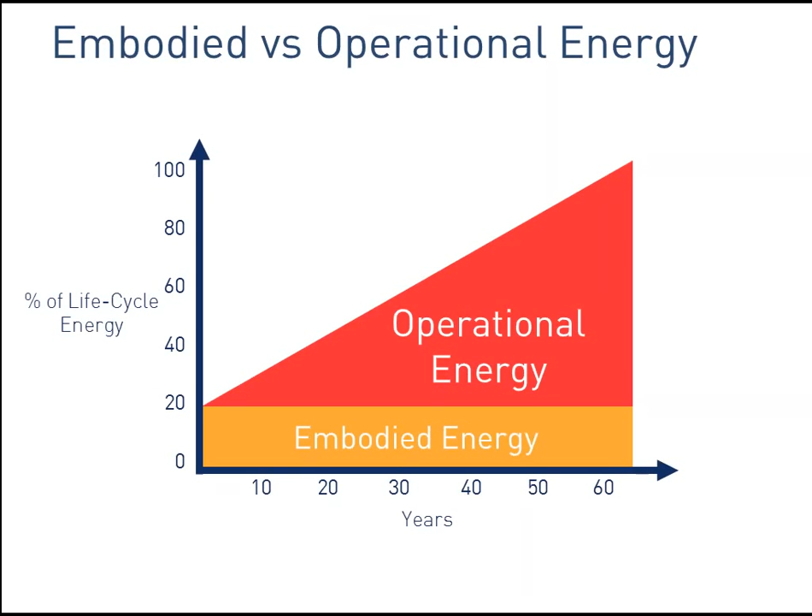The embodied energy - the actual materials that go into building that building - is dwarfed by the operational energy. And that's not a hit against historical buildings. I'm a huge advocate of historical preservation and historical buildings, but I think folks in that world need to get their facts straight - you shouldn't do it for the embodied energy aspect of it.

It's also good to keep in mind, in terms of embodied energy, one of the biggest factors in the building really is the foundation system and the steel components and concrete components - the biggest chunk.

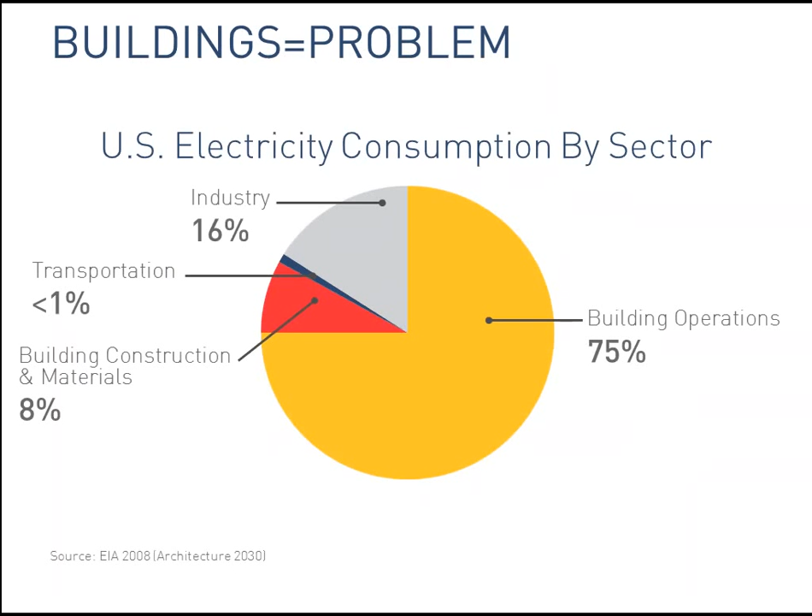In that first pie graph I showed, we were looking at energy use across not just electricity, but all energy. This graph shows the impact building operations have on electricity consumption specifically, where building operations take about 75% of all electricity used in the United States.

This is another tenet of the 2030 challenge - we have a huge opportunity ahead of us, by 2035 about 75% of all buildings will either be new or renovated.

Can you give a little more background on the 2030 challenge? Yeah, I mean, it's essentially started by Ed Mazria. You want to give a little?

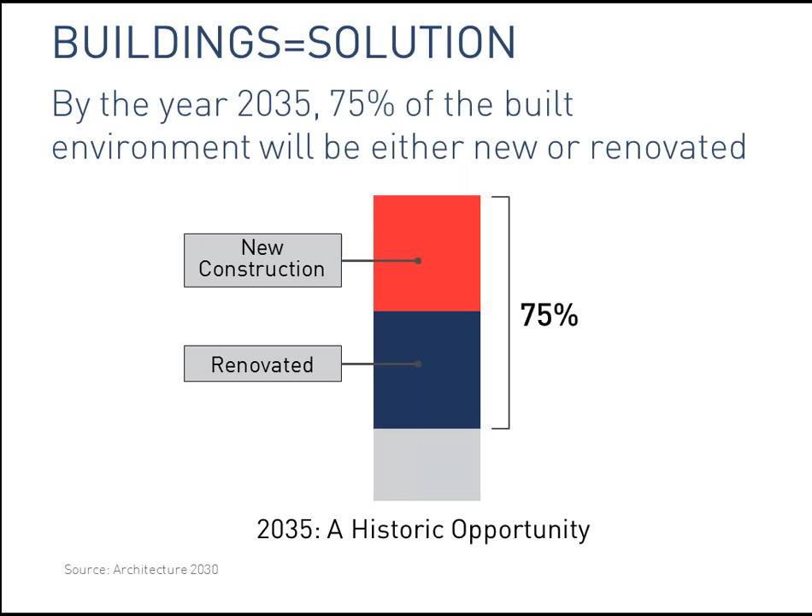It's essentially a lot of it's kind of like there was a really big push, especially during the recession, to get a lot of initiatives passed to put people back to work, retrofitting and improving buildings and making building codes more stringent. The goal is that by 2030 we can have our buildings be carbon neutral, essentially. Ed was one of the really early passive solar guys, and a lot of the things we're talking about today are things he's been a proponent of for 20 to 30 years or longer.

He said the volume is horrible here. We've had some issues. I'll hold it right here.

The folks in here are probably pretty savvy, but just a reminder in terms of energy consumption or electricity consumption in the state, a lot of people have the misconception that it's clean hydroelectricity and we shouldn't really worry about it. But in reality, the U.S. grid is broken up into three sections.

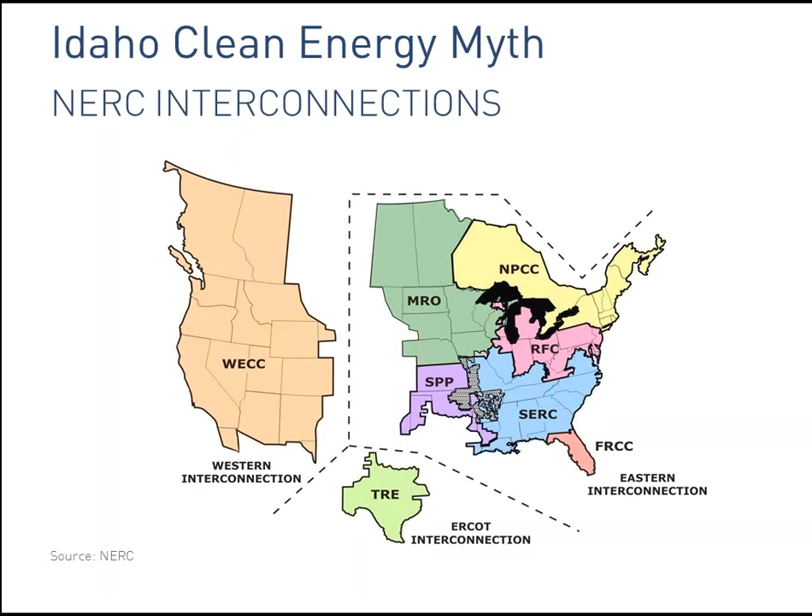We basically have the Western Interconnect, the Eastern Interconnect, and the Texas Interconnect. Essentially all the electricity in the Western grid pretty much flows freely between the whole region, so any hydroelectricity produced in Idaho can get shipped anywhere. So if we can conserve a kilowatt of hydroelectricity here, that prevents a kilowatt of coal being burnt somewhere else.

Then Scott, give a little bit of background on the passive house standard now. Information about why this is important, and why it's really good to learn about that, the passive house standard, what that is and what it's changed about.

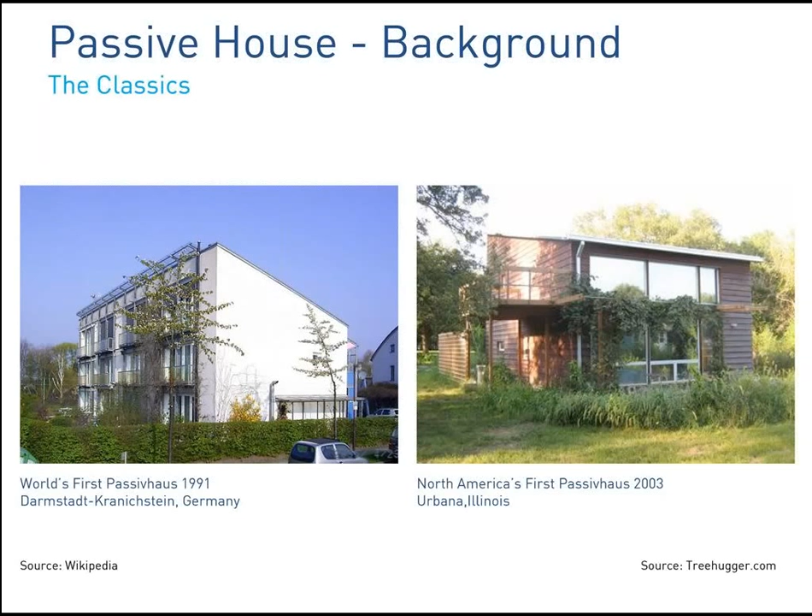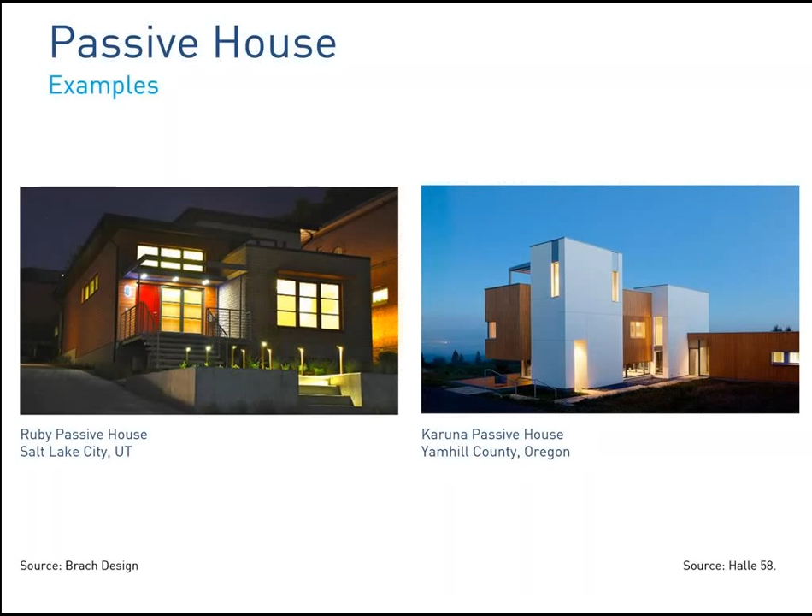A couple of projects we looked at - one on the left is in Salt Lake City, designed by Dave Brach, and I actually worked a lot on that project. The one on the right is a very nice project in Oregon that Skylar was involved in. That's a net zero energy project, and in addition to being passive house certified, it also has a Swiss certification called Minergie, and it's a LEED Platinum building. It was a really cool project to work on.

So what is it? We covered the principles and the science, but these ideas are really what you come away with if you have someone interested. I think these principles of air quality and superior comfort come through - there's a lot of insulation in this house, there aren't any cold spots, there aren't any drafts. In front of a window, you don't feel that cool air. The envelope is very, very tight, and the air quality is very good.

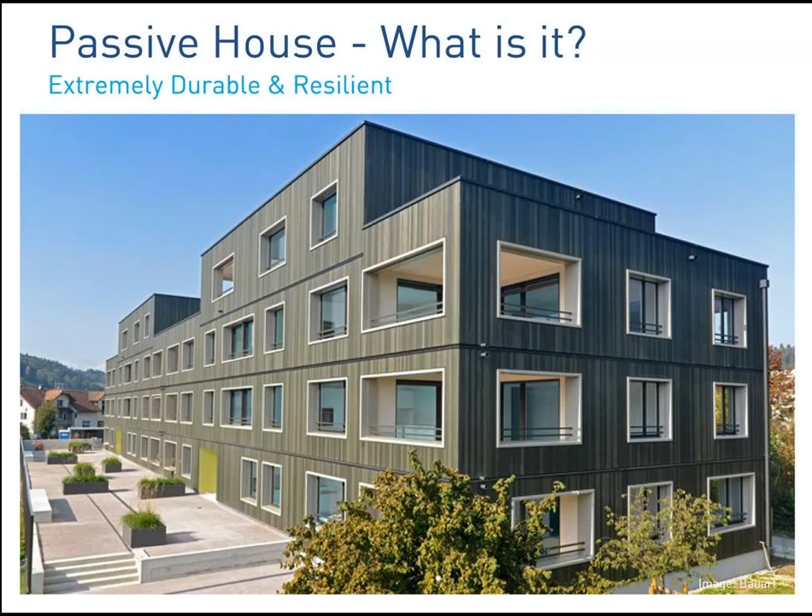If we had just designed this project to the LEED standard, for example, and done LEED Platinum, our array would have probably been three times the size. By investing less in renewables, we were able to put that into the shell and get really high performance windows. These walls are R60 walls, with R100 roof assemblies and R40 plus foundation systems.

Now we can really dive into the principles of what makes a passive house a passive house. This isn't really breaking news—people do bits and pieces of this, and in Boise, people are already doing a lot of these things. But it's really about bringing all these things together in the proper way that makes this possible. So we start with this little model house.

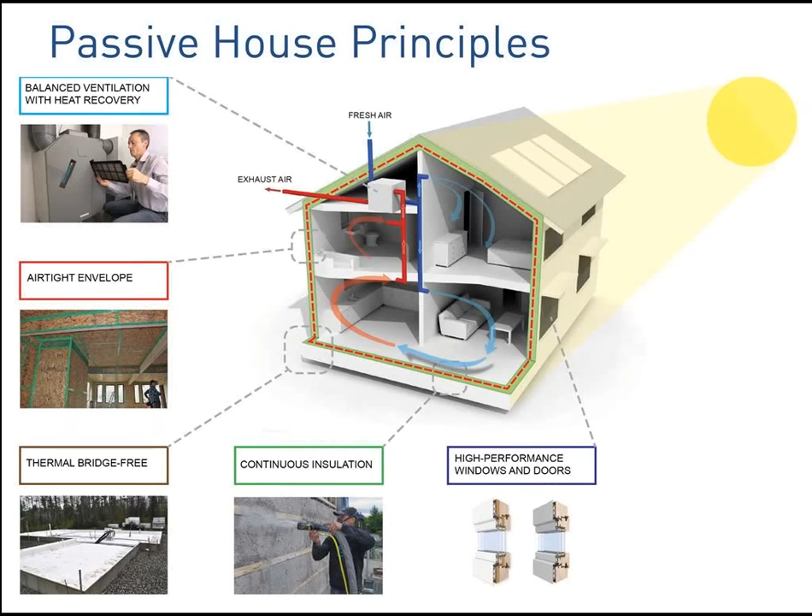Then there's the balanced heat recovery ventilation. We're making the building tight, so we're able to control the airflow through it—a really high performance, 90% plus efficient ERV or HRV that's able to bring fresh air into the house and remove pollutants.

A big key here is that sometimes passive house and passive solar get confused. Although in our energy calculations we do take into account solar gains, these projects aren't the mass and glass, old school passive solar projects where you try to capture as much solar energy as possible and store it in a slab or water bottles or rocks. It's really about optimizing shading strategies so we don't have to rely on huge diurnal swings of bringing in temporary energy and storing it overnight, where the house just loses all that energy. It's really about moderating the heat levels and temperature in the home.

So you mentioned the ERV and the HRV—what are those and what's the difference? I'll get into more depth on that, but basically they're a box. The question was, what is the ERV or HRV and what's the difference?

Essentially they both recover heat energy. If you have stale air exhausting out of your home, you're bringing fresh air in, and that incoming air gets tempered by the air leaving through a core in the building. It's basically a box with two really efficient fans that provide constant air exchange without a huge energy penalty. The difference is that the energy recovery ventilator not only recovers heat but also recovers moisture from the airstream. I'll go into more detail on that in a little bit.

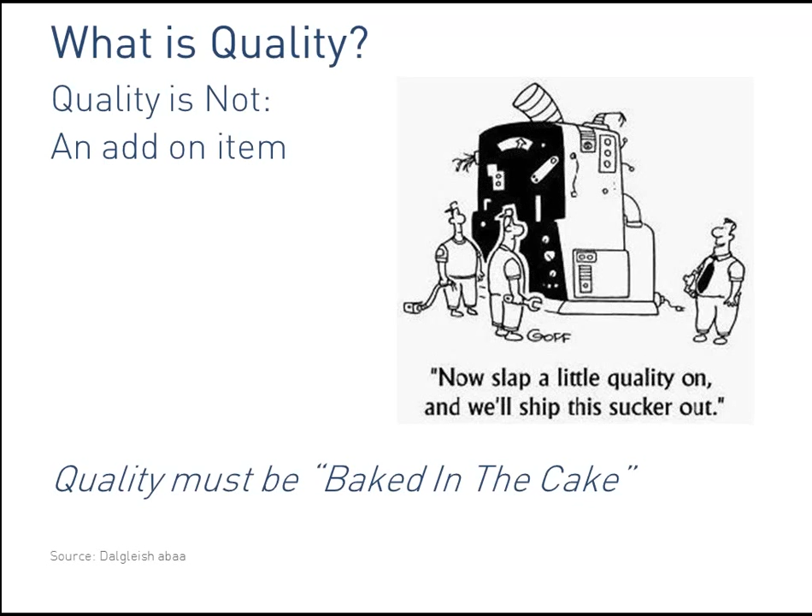There's this little cartoon here where these guys just whipped out a machine, and now they're ready to slap it through their quality control checklist to make sure it's a good piece of equipment—that just doesn't work. So the cool thing about Passive House is it's a purely performance-based criteria, all about the energy use in the building, and as a designer you have the freedom to use your building science knowledge to make it work.

So these are really the three. It's not a prescriptive standard, but it's really important that you basically have to meet them. You have an infinite variety of ways to do that, with all the materials available to you as a designer or builder, or just what you want to use for different reasons. So you just have to put it together in the right way to get to these.

If you're one of the designers lucky enough to have great solar gain, you can leverage that and optimize your design, actually reducing your insulation levels and balancing everything. And if your project is in the city or a densely forested area, you can utilize better performing windows and super insulation to reach the goal however you want to do it.

So the cool thing about passive house is this annual heat demand criteria - that's really what differentiates the standard. It puts a very strict limit on how much heating can be used in the building over the year. It also has another limit - in the U.S. we talk a lot about energy use per square foot, which is a really common metric especially in commercial buildings. Passive house takes that one step further and makes you account for your source energy - not just the electricity used on site, but the energy required to produce that kilowatt of electricity. The other final tenet is airtightness, which is a huge component of quality, comfort, and durability.

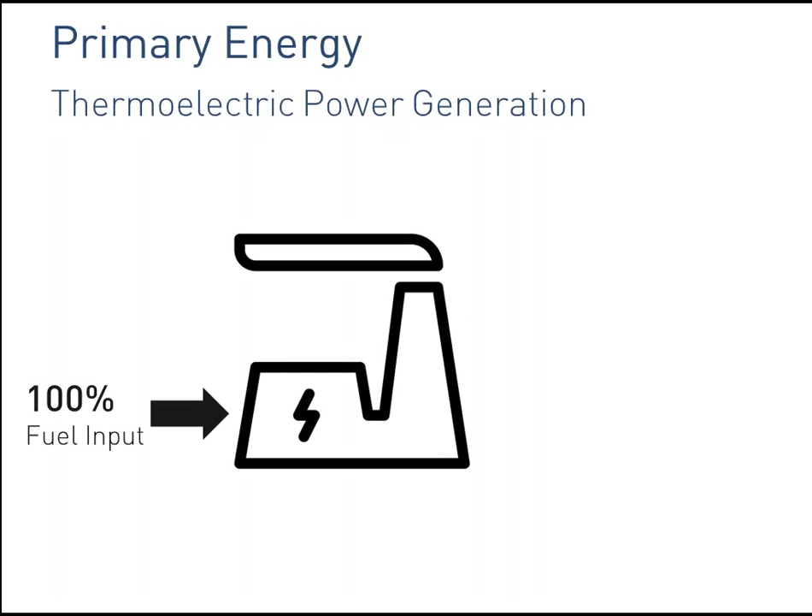For those of you not up to speed on site energy versus primary energy, let's run through a quick exercise. If you're at a thermoelectric power plant, say you start with 100 units, basically 60% of that goes up the stack as waste heat, and about 40% goes out as electricity. We use a lot of that initial energy just as waste heat in the conversion to electricity.

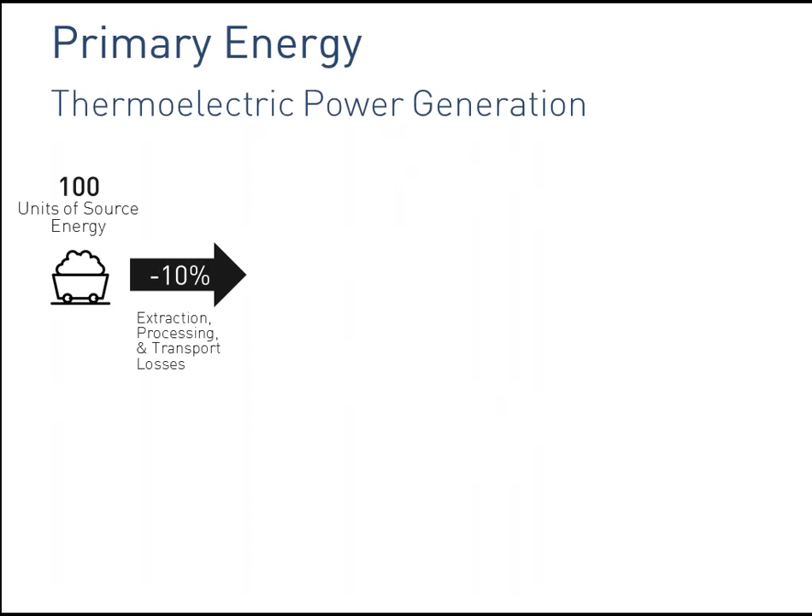This is going through how the Passive House Institute calculates primary energy. At the coal factory or coal mine, there's energy used in extraction, processing, and transport. If you start out with 100 units of energy, you end up with 90 that actually gets to the power plant, and then you have 60% conversion losses.

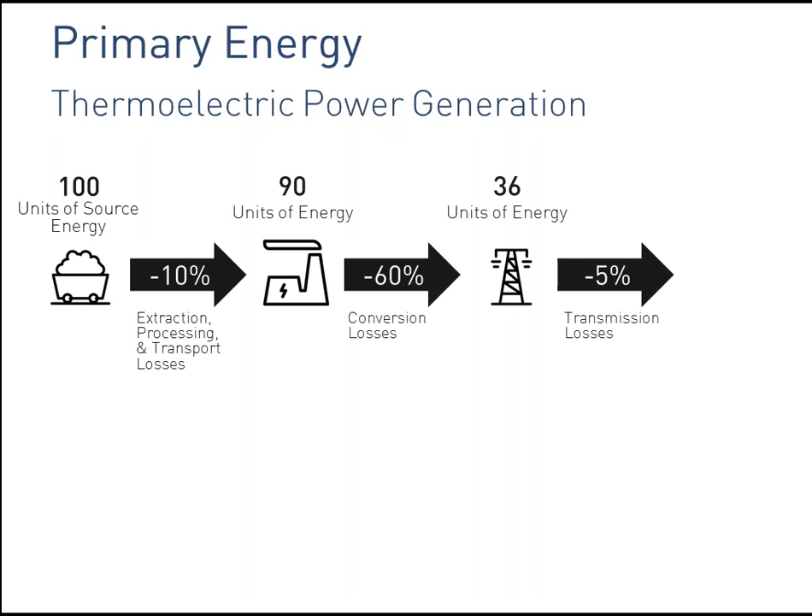And so you have 36 units of energy that go to the grid. Then the grid itself might have a few percent transmission loss. So in the end, the site energy, where you started out with 100 units of energy, that's the electricity that actually gets to your home.

So 3 units of source energy roughly equal 1 unit of site electricity. Compare that to natural gas. If you use natural gas to cook or heat your hot water, you have a much better source-to-site conversion. You lose very little in distribution or extraction processing, and if you start out with 100 units of source energy, you get 90 units of site energy, which is more favorable in terms of primary or source energy.

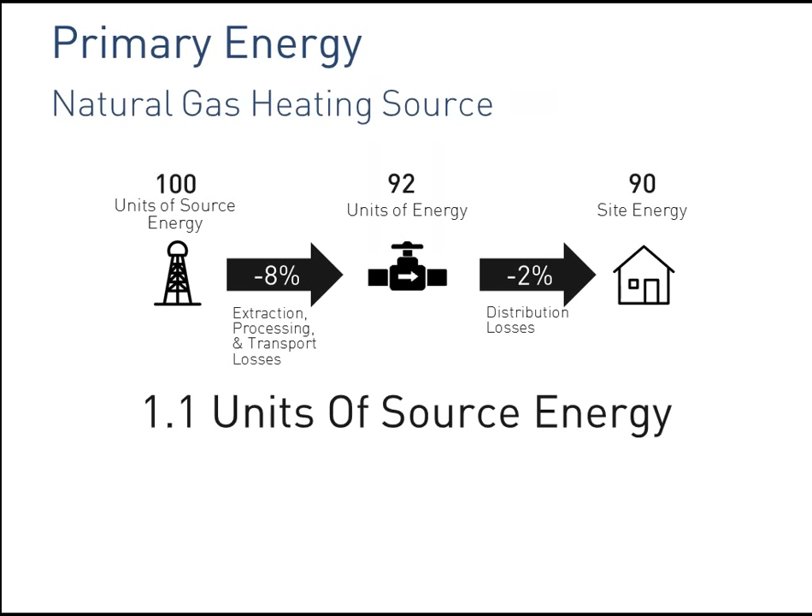And that's why on the electricity side, even in a passive house, which generally has a small heating load, that can offset inefficiencies of the electrical system.

With that in mind, the typical nomenclature in the U.S. is to use the EUI, especially on commercial buildings. With passive house, if you have an all-electric project, to get to the passive house standard you need to multiply that by the primary energy factor, which is another thing that's changing on the electrical grid makeup.

So essentially, if you have a house that is an all-electric passive house, your EUI is around 14. For those familiar with energy use index, that's a very, very low number. A lot of people confuse this and say, oh, my house is a passive house, it meets 38.1 kBTUs per square foot per year, but they're not doing the site-to-source conversion, so it's totally apples to oranges.

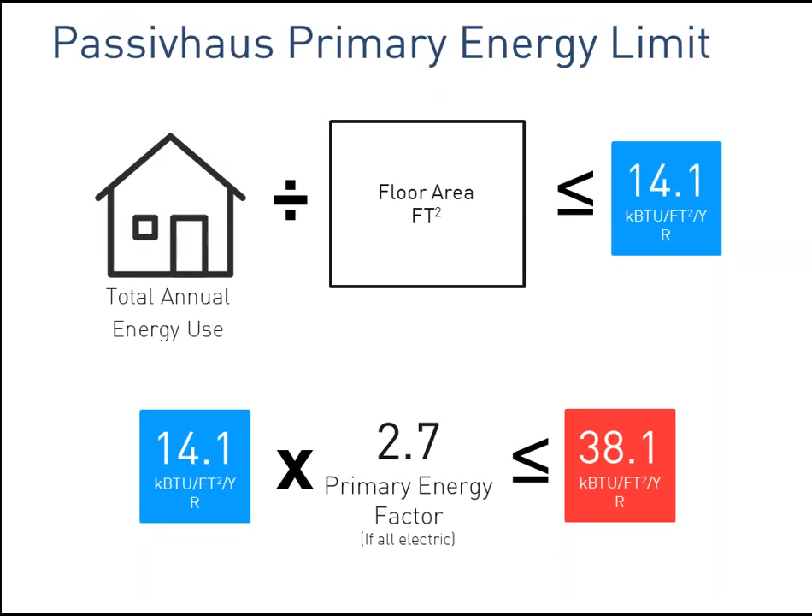So the cool thing about this standard is right away when you start a project, you have an idea with source energy—even if you just know you're going to build a 2,000 square foot house—if you know you're going to achieve passive, it gives you a starting point at the onset to get an idea of your carbon emissions and your on-site electricity usage. It's a very good tool because you know really early in the phases how much energy the building is using if you design it to the standard.

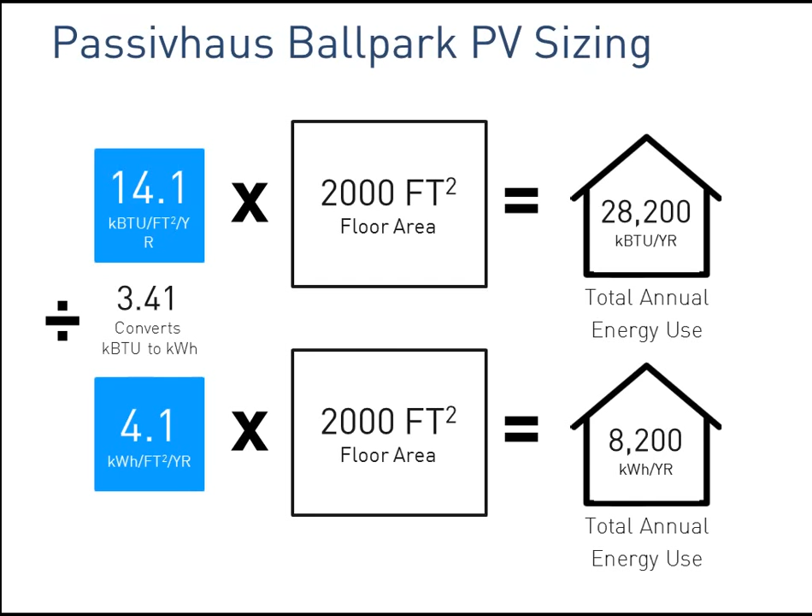And it's really great on net zero energy projects because these energy metrics give you a pretty good understanding of what your PV system size is going to be if you're trying to have either source or site energy net zero. You can quickly run through calculations where you take the EUI in kBTU and see what your annual energy consumption is going to be. You can take PV system performance in Boise, convert that into what your system size is in kWs, and have a really good idea of whether you can fit the system on your roof.

Can I fit it in my lawn? Does net zero make sense for your project? If you don't have solar access and a building that's very dense and very tall, it's likely you're not going to have enough roof space for a PV system. So you can know really early in the project, if I design to this very stringent standard, what my PV size is going to be.

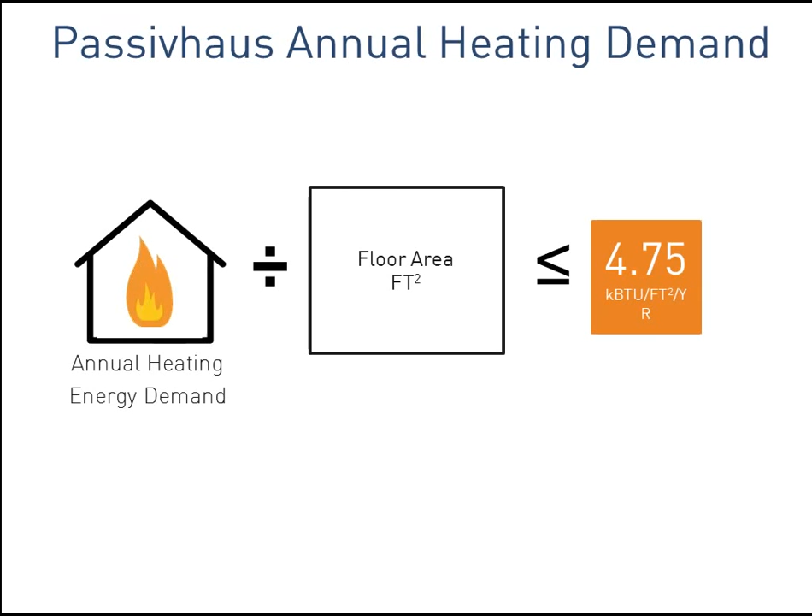And then the same kind of limit is set on the heating demand, which is how much energy the house is predicted to need for heating. So again, early in the project you can say, okay, if I design to the passive house standard, I'm going to roughly use this much annual heating demand, just depending on the size of the home.

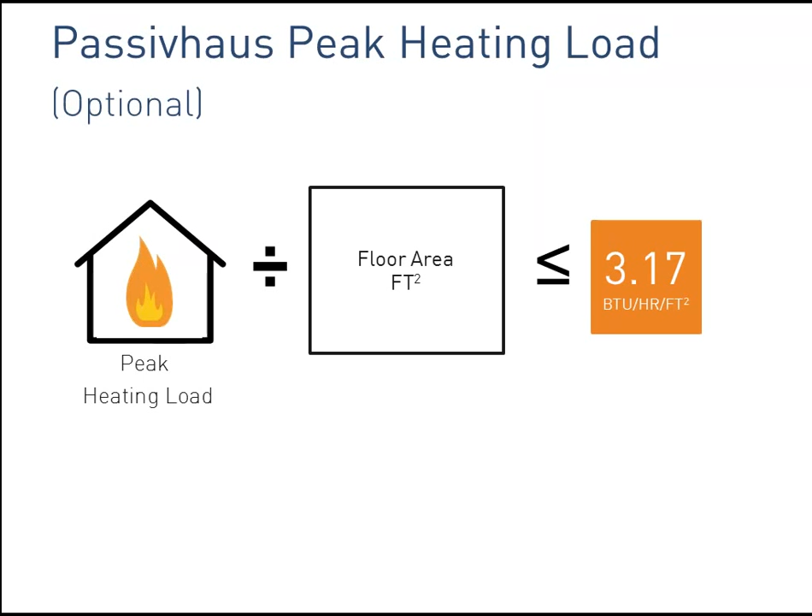Then another piece of the puzzle is an optional part, and this is again very climate specific—if you can meet the stringent peak heating load requirement of the passive house standard, you can also certify under that. This originated with the concept of being able to heat the house with the heat recovery ventilator, heating that airstream instead of having a traditional furnace. There's a standard that allows you, if you design the shell to a high enough level of performance, that on the coldest design temperature of the year you can heat the house for under 3 BTUs, you can also meet the standard that way. So if you design to the standard with a 2,000 square foot house, you know what your peak heating load is going to be.

To put this in perspective, if you design a 2,000 square foot passive house in Boise, its peak heating load is going to be just over 6,000 BTUs per hour. A human, depending on activity level, puts out about 350 BTUs per hour. So a family of 4 living in this 2,000 square foot house on a design day, one of the colder days, can actually meet 22% of the home's heating demand, the peak load, just from their own body heat. That's how high-performance these shells are.

Passive house uses a slightly different design day. Instead of sizing your heating and cooling equipment to the absolute coldest temperature, like say it can get to -10 in Boise, we don't design to that. We design to a more realistic temperature, like -2 or 10 degrees, which is basically the temperature where if it's 10 degrees outside and 70 degrees inside, we ask how many BTUs we need to add to the building. At that temperature the building has lower performance, more heat loss, so you need to input more energy to meet the load.

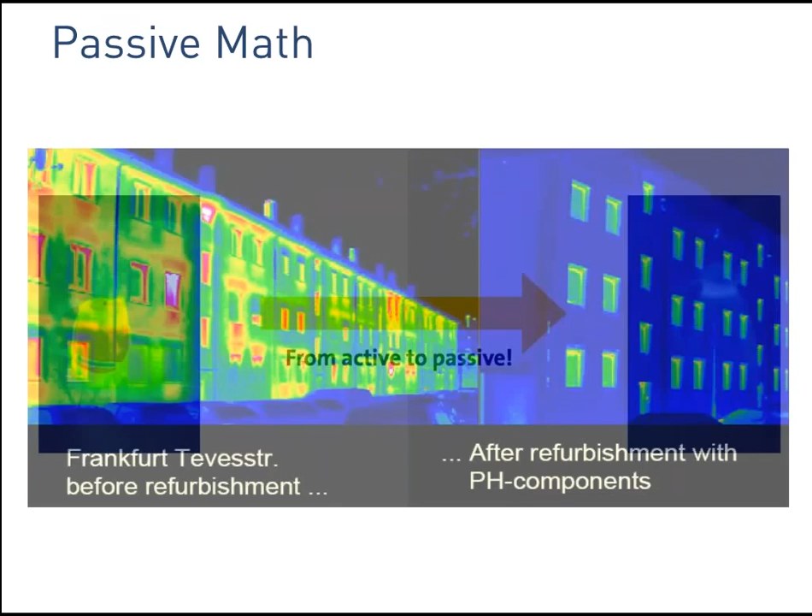One of the things with a high-performance building is that the free heat from internal gains inside the building can be, and in most cases is, especially in North America with our higher plug loads, as important as solar gains. So passive house really isn't entirely a passive solar standard.

What happens in the summertime with refrigerators and other appliances? It's similar—a regular house typically has all those things too, except these appliances are even more efficient and generally have less heat output. If they have a heat pump system used for heating, that same system is usually used for cooling. Just like your refrigerator, you want it sealed tight, gasket tight, and well insulated, and then the heat pump pulls that heat out and cools the temperature down. The same concept works on a bigger scale.

You have these plug loads generating heat in your home, and if you have multiple consecutive hot days in a row, a passive house is going to need cooling just like any other house would. If there's not enough diurnal swing at night to do night flushing, the ventilation systems have a core bypass that does night flush and cooling, so it doesn't recover the heat inside the building—it actually rejects it and brings cool air in. So there are a lot of strategies.

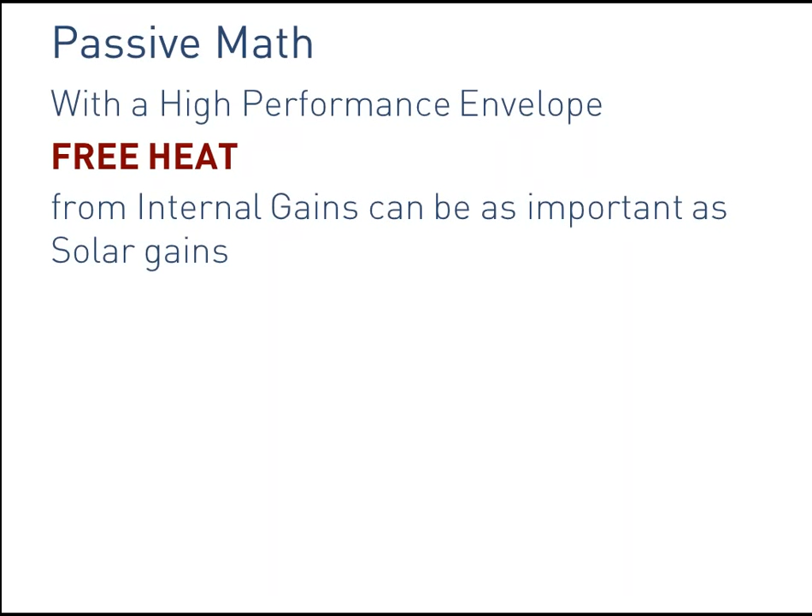Back in the 70s and early 80s, when people didn't have high performance insulation systems and had these high heat losses, the goal was to ramp up and get as many solar gains as you can, because you're going to lose them all anyway. That's where passive solar really came from.

But with passive house, instead of having all this extra added heat, the goal is to really minimize the loads. So when you super insulate, use high performance windows and doors, and make the building extremely airtight, you get those heat losses down to where now your internal gains and solar gains become meaningful and actually useful. Typical passive house design reduces the heating demand by about 90%.

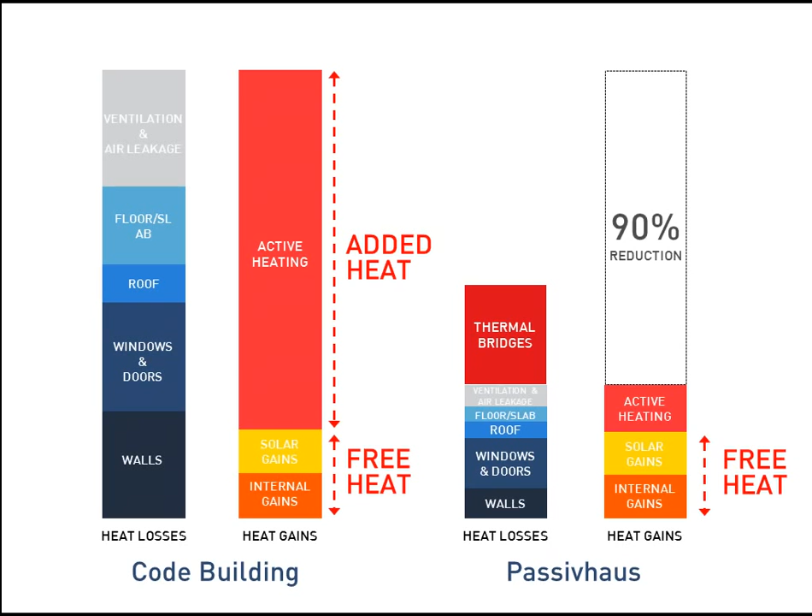The simple concept here is that heat transfer occurs from the warm side of the wall to the cold side of the wall. If we have an R20 wall and we want to cut that heat flow in half to get to our really low passive house load, hey, all we have to do is double the insulation. We go from R20 to R40, and we're on our way to getting a passive house. But it turns out it's not that easy.

This is a quote from Dr. Feist, one of the founders of the passive house standard. He says: 'I was working as a physicist when I read that the construction industry had experimented with adding insulation to new buildings and that energy consumption had failed to reduce. This offended me. It was counter to the basic laws of physics. I knew that they must be doing something wrong. So I made it my mission to find out what, and to establish what was needed to do it right.'

The early experiments in low energy buildings really weren't panning out, and it just didn't make sense, because technically the insulation—it's simple physics—it should work.

I'm going to run through some scenarios. Let's say we have a standard 2x6 wall with typical cavity insulation, roughly R20. A typical house has a 20 to 25% framing factor—basically, if you stacked up all the wood in the house that holds the structure up, it would account for the equivalent of one entire wall out of four being solid wood. That's the magnitude of wood framing in a typical home. So the heat loss through this wall is really dominated by the wood instead of the insulation.

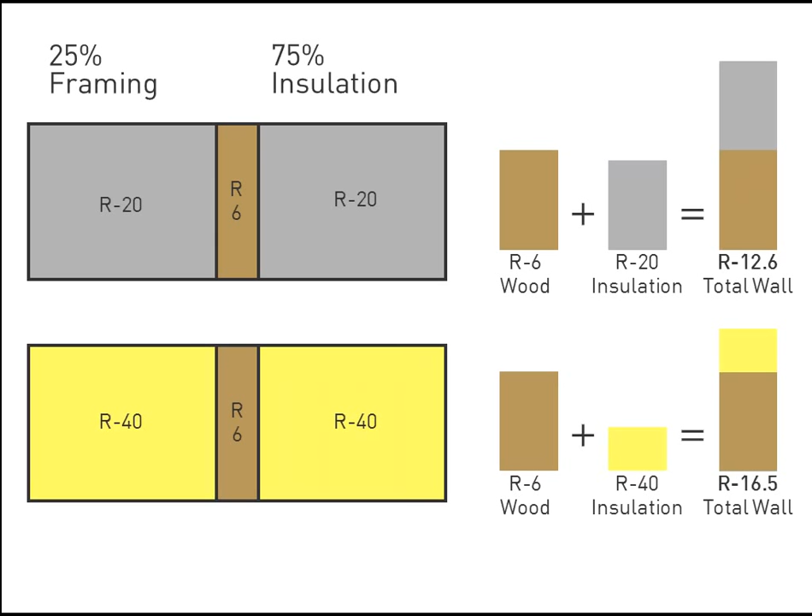If I get some really expensive insulation, say closed cell spray foam in the cavity, and keep my framing the same, you cut your R20 heat flow in half, going from R20 to R40, but you didn't do anything about the R6 framing. The heat loss is still the same through the studs, and your overall wall R-value only went from 12.6 to 16.5. So we can't just look at our cavity insulation values—we need to look at everything as a whole.

This concept is the same as if you had a bucket leaking water with 4 holes in it. We don't address the actual leaks themselves, we just make the bucket twice as thick—we're not going to stop any of the water leaking out. When designing a passive house, we're really focusing on the weak spots, the leaks and holes in our bucket, rather than just making our walls arbitrarily R100 with a poor performing element right next to it. It's about the whole picture.

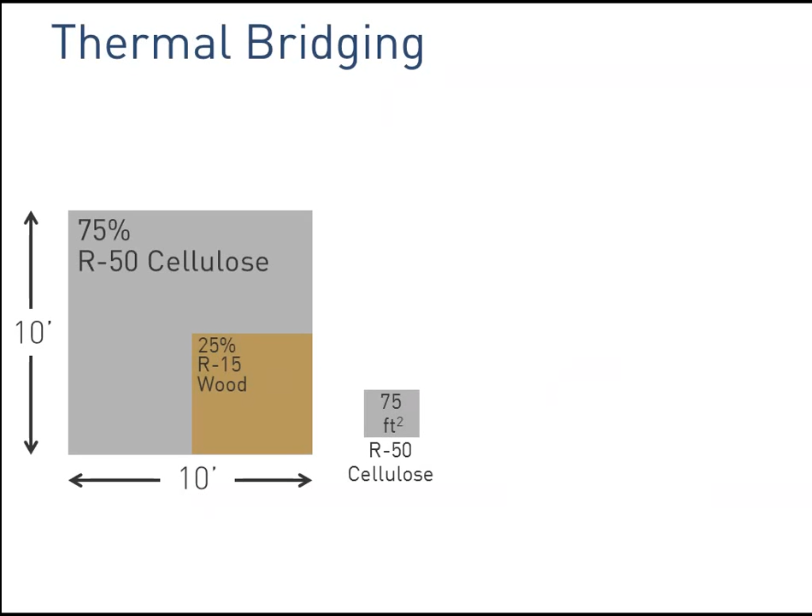Here's another example. If we started out wanting an R50 wall using an R50 cellulose assembly, you'd need a wall about 12 inches thick, so a 2x12 would be the structural portion. Wood is about R1.2 per inch, so a 2x12 is roughly R15. That wall goes down from an R50 wall—once you add the framing, it drops to about an R32 wall, which is about 58% more heat loss than if you just called it an R50 wall.

Here's an example. If we have that R50 wall, with 1 foot of stem wall exposed to the edge, there's enough heat loss through that, just 10% of the wall assembly being concrete, that the heat loss to the concrete dwarfs the heat loss to the R50 wall assembly, and the overall assembly as a whole is only an R7.

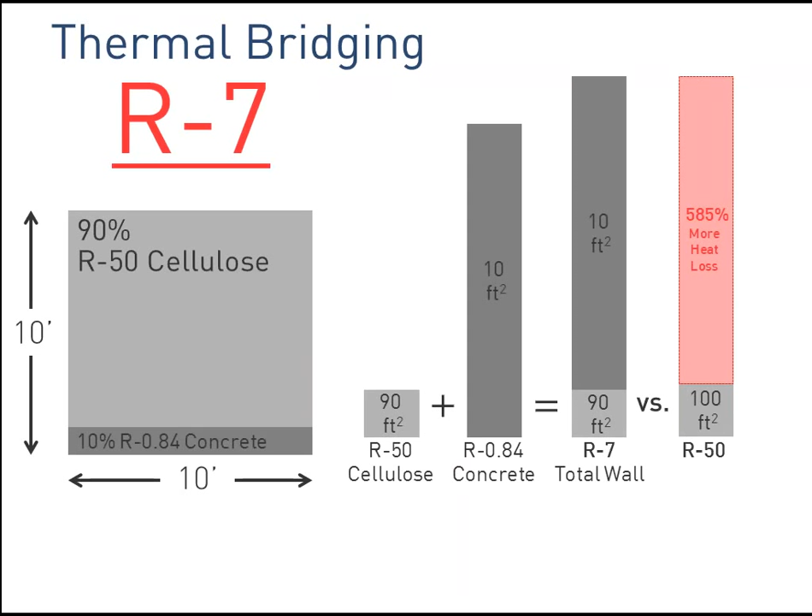And so you have to focus on these weak points in the building, and that's what passive house really focuses on, is these thermal bridges that add up to a lot of heat loss.

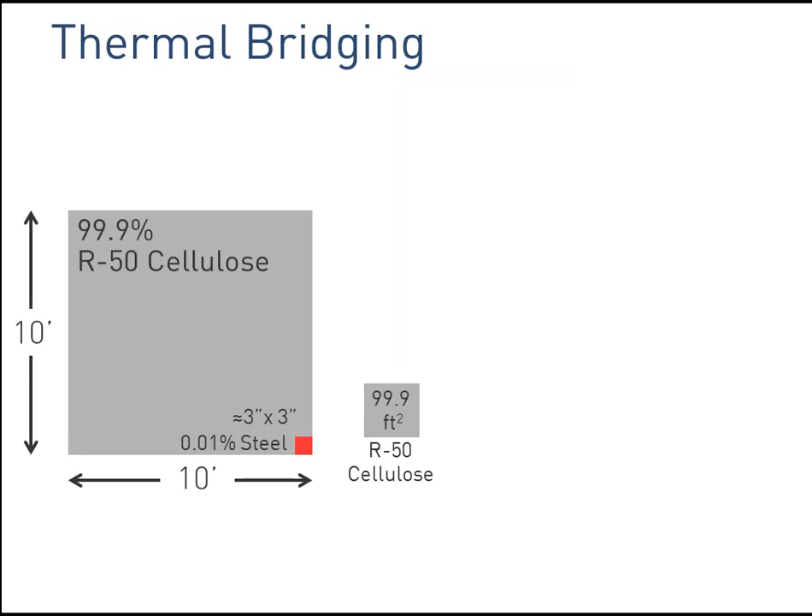Here's an example with steel. So if we have 99.9% of the surface area of your passive house as this R50 wall, and then you poke a 3-inch by 3-inch piece of steel just through one little part because your structural engineer wanted you to do that—this is the heat loss through the 99.9 square feet of cellulose here. And just that little 3 by 3 inch, 12-inch piece of steel going through that wall has more heat loss than the 99.9 square feet of the R50 wall, and that degrades the whole wall, just that small piece of steel, down to R21.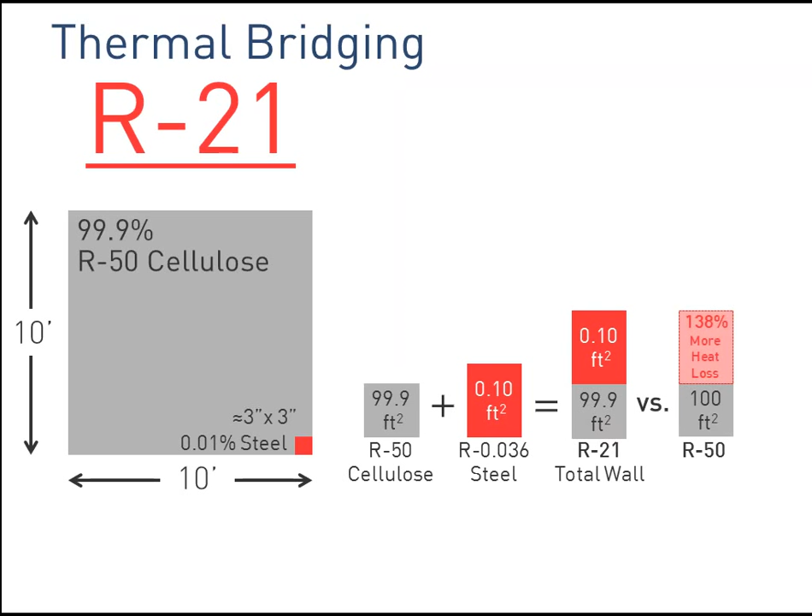So that's 138% more heat loss. And if you didn't account for that in your energy modeling program, and you had that continuous throughout a building, it would add up to a large amount, and your building wouldn't perform how you expected it to. Could potentially have condensation and other problems as well.

The same kind of philosophy goes with insulation systems, and installation quality is very, very important. Very small flaws in the system can have huge impacts on the overall performance of the assembly, especially when you get into these super insulated assemblies.

Air tightness is also a very critical component. Basically all insulation, in general, is trapped air. That's why we used to be furry—hair trapped air around our body, and it kept us warmer. That's all we're trying to do with insulation.

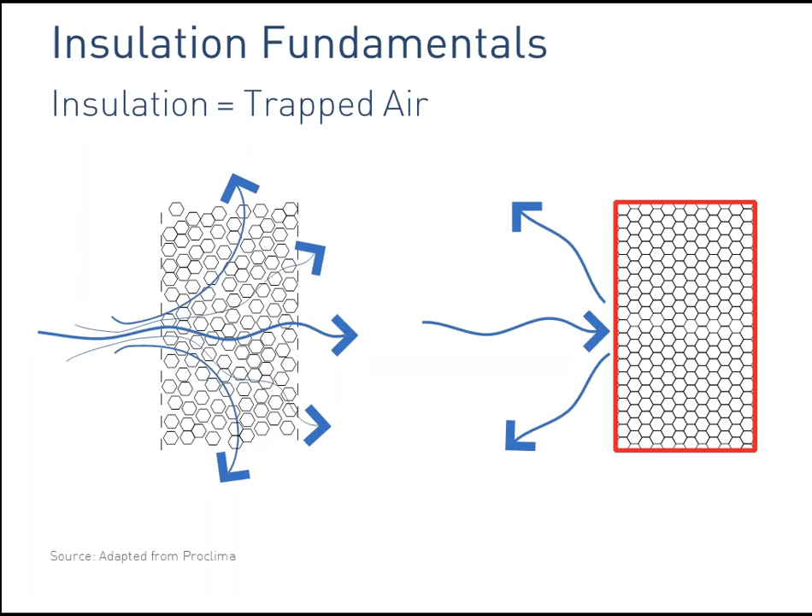So you can think of this diagram here. We've got insulation with wind blowing through it—it's not effective. Just like if you go up to Bogus or Brundage Mountain without your windbreaker on and you start bombing down the mountain in just a wool sweater, you're going to freeze because you don't have that air barrier.

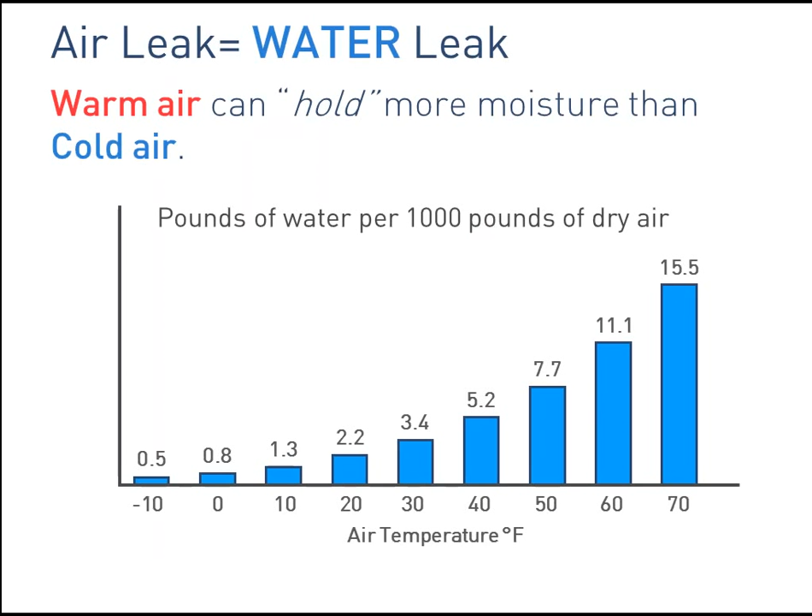This is just showing how much moisture capacity warm air has versus cold air, which has implications in terms of durability. We have outside air that's at 0 degrees, 80% relative humidity—the dew point's about -5, and that's the moisture capacity for that.

So if we bring that outside air on a cold winter day into our home and heat that 80% relative humidity air up, the moisture content stays the same, but the storage capacity increases because of the additional energy inside. That's why homes in the winter, especially in Boise and McCall when we have these cold snaps, get very low humidity in the house, because of uncontrolled infiltration that's dehumidifying and drying the home out.

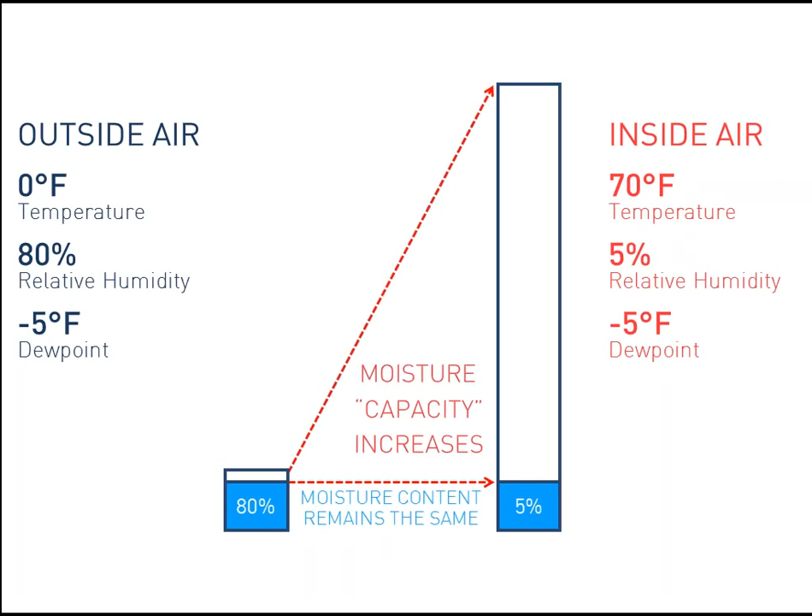But going the opposite direction, if you have indoor air that's 30% relative humidity at 70 degrees, the dew point's 37 degrees. So if it's able to transfer through your wall assembly to the outside cold side through uncontrolled air leakage, you could potentially have condensation, moisture accumulation, and problems. So it's very important to build airtight.

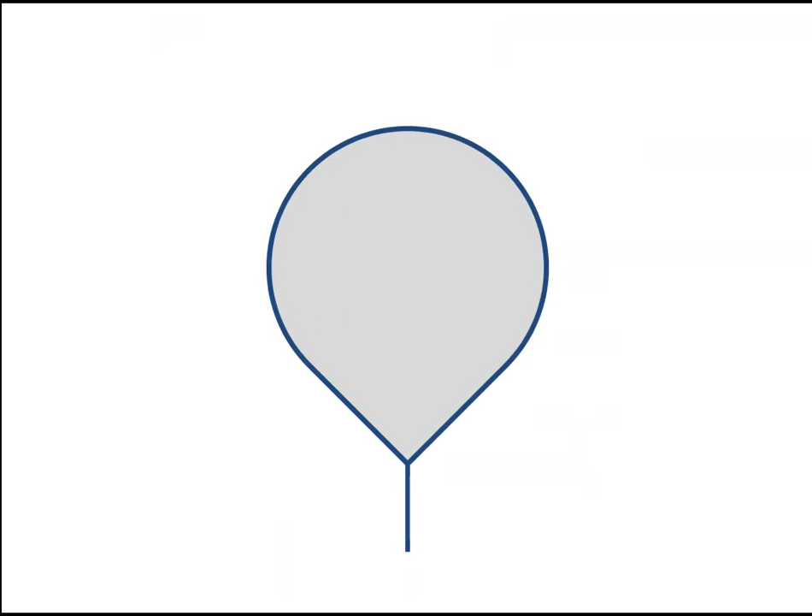But if you have just a small leak and you have a pressure differential in the house driving air through that hole, it can deposit just gallons of water.

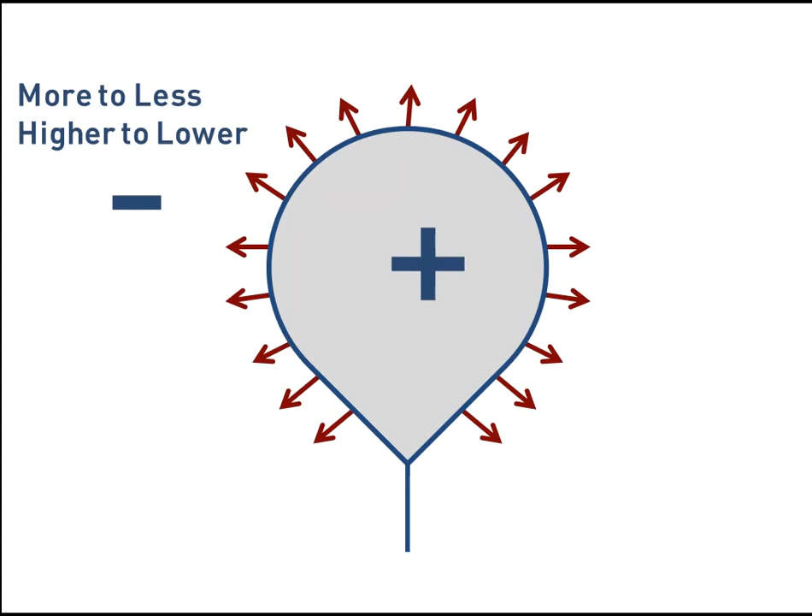How are we doing on time here? Ready for a break? Okay. Yeah, that's fine.

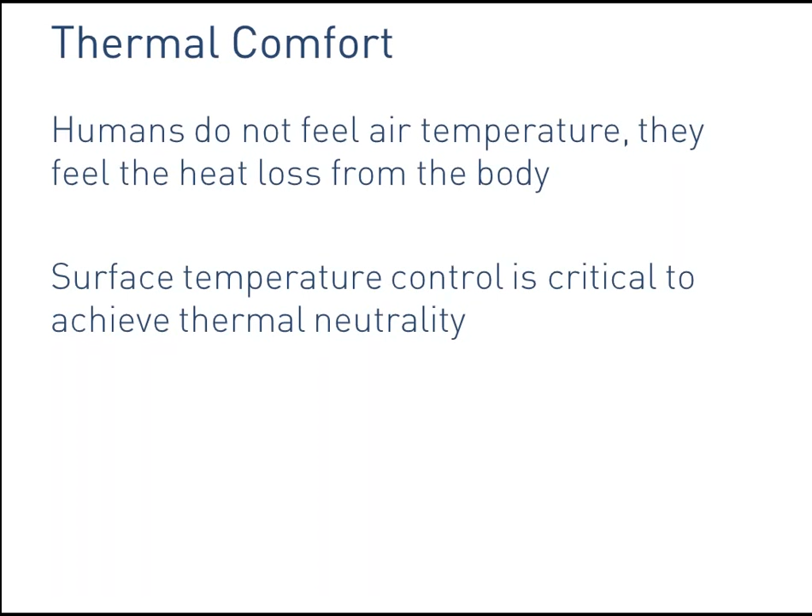Surface temperature control is critical to achieving thermal neutrality in a building—that point where you're sitting on your sofa and you really don't have a care in the world. You don't feel a draft, you don't feel any cold spots. That's really what we're trying to achieve in a passive house: complete thermal neutrality.

A lot of people measure comfort in the United States especially by a simple metric of air temperature. If it's wintertime and it's 70, 72 degrees in a room, heck, it's comfortable. But any of us who have actually lived in a building, especially in a cold climate like Boise, know that surface temperatures have a major impact on our comfort, even if the air temperature is satisfied in the room.

So if we have a room that has 70-degree air, but we have a cold ceiling from a poorly insulated attic, or a cold floor from a poorly insulated or drafty floor system, or low-performance windows—we've all, I'm sure, on a cold day been next to a window, and even though the room temperature is warm, we felt a chill coming off of that window.

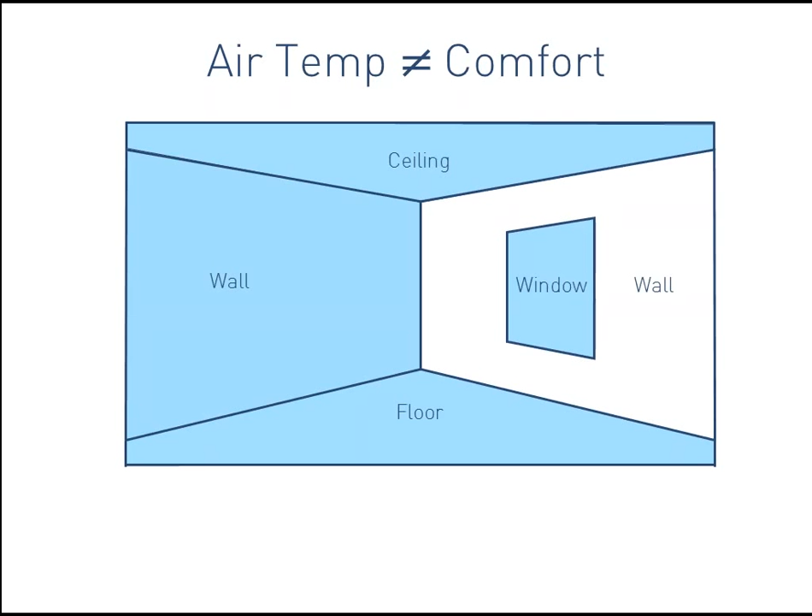That's because our body is constantly exchanging energy with our surroundings, and when you have a very cold object, we're going to radiate heat to it and feel a sensation of coolness, even if the air temperature is warm. The same goes for walls—if you've ever sat next to a really cold wall next to your couch, you can really feel that energy getting sucked from your body, and it's uncomfortable.

Also, even if you have a really high-performance floor, wall, window, and ceiling, if those components aren't connected properly or in a thermal bridge-free manner, and there are weaknesses, you're going to have these radiating—basically cold radiators—all around your home, making you uncomfortable.

One of the biggest pieces of comfort in a passive house project comes from these really high-performance windows that we talked about a little bit earlier. Basically, in our climate zone, triple pane is the standard.

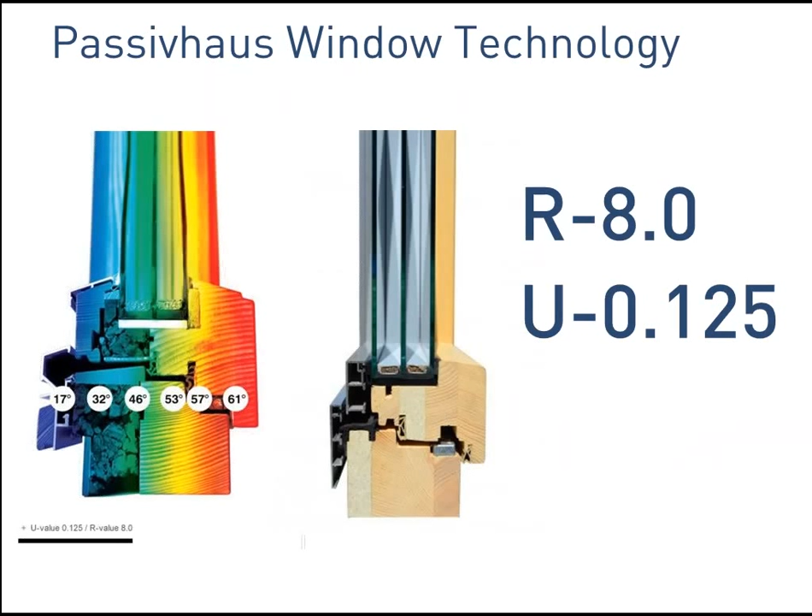And this isn't like a little 1-inch triple pane. For the most part, these are about 1 7/8 inch triple pane units with a really fat airspace filled with argon, and two layers of low-E coatings. So the center of these windows performs at about R11, and we get an overall value in the R8 range when you account for the frame.

To understand the importance of windows: if you have an R50 wall, and I see this a lot on projects in Boise and McCall, someone spends a lot of money, builds a double stud high-performance wall, then puts an R3 window in that assembly. I'm concerned people aren't doing energy calculations, because that window, even with only a 15% glazing percentage, brings the whole performance of that wall from R50 down to R15 - a 70% reduction.

So theoretically, let's say you don't want to spend money on expensive windows. Heck, I'll just make my wall R100 because I don't want those fancy windows. That really only improves things if you go from an R50 wall to an R100 wall - and even though that's 85% of the surface area of the wall, it only gives you a 2% improvement.

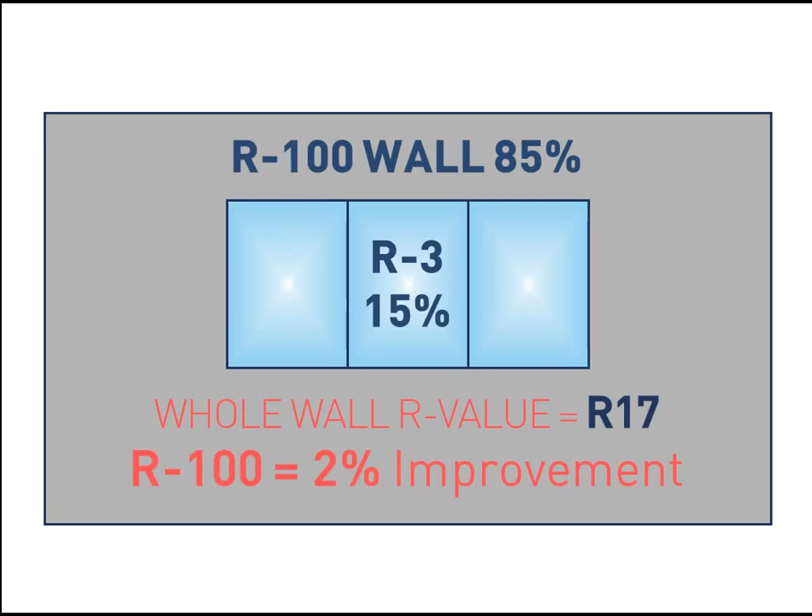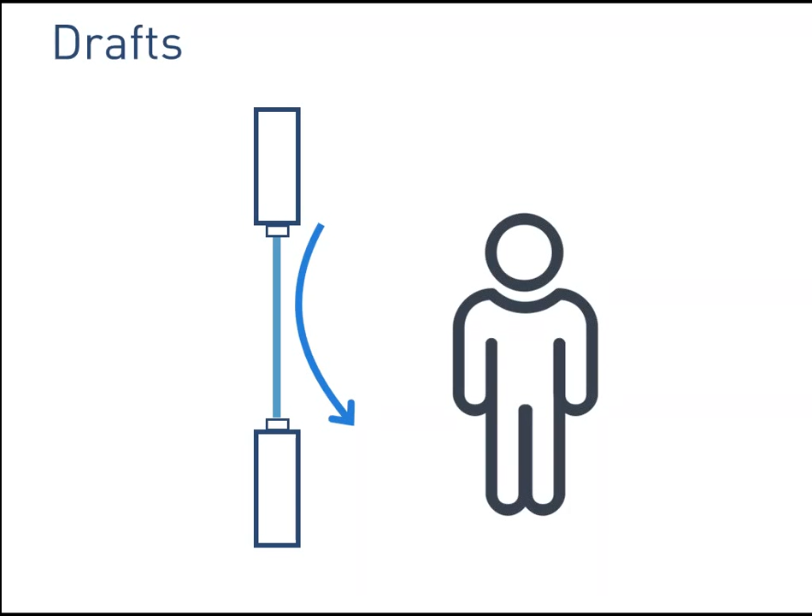So you really want to focus on the weak spots, just like thermal bridges. If you take that R50 wall and put in an R8 passive house window, your overall assembly value is now R28, compared to R15 with that R3 window. It's a big advantage in high-performance buildings. And these high-performance frames and glazing systems result in no drafts and no local discomfort near the windows - you don't get that radiative loss to the cold surface temperature of the glass.

Moving on from windows, back to this idea of having control of your building. This is one example in typical construction where we ignore the fundamental physics of how buildings work. Most homes have a standard dryer, and when it kicks on, it exhausts between 150-200 CFM of air out of the building, replaced with air from outside. When you run a dryer for 60 minutes, you exhaust about 12,000 cubic feet of air - in a 1,500-1,800 square foot house, that's all the air in your home, replaced with cold outside air making its way in through your garage, crawl space, and other flaws in the enclosure.

In passive house, this isn't the approach - we're not ignoring the basic reality that if a CFM of exhaust air goes out of a home, a CFM must come in to replace it. To give you scale: we think of air as this invisible, light thing, but it has mass - that dryer running its 60-minute cycle at 200 CFM exhausts 900 pounds of air out of your home. Even though air is invisible, it's important to think of that. That's just a lot of energy being wasted.

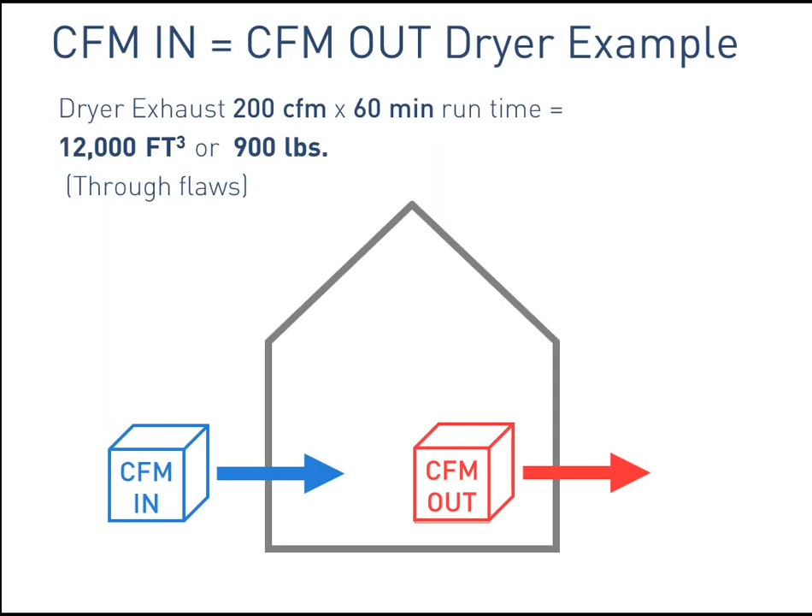In a passive house, we use units like these. I've got a couple projects in McCall with this unit slated to go in. They're actually a heat pump dryer, similar to a condensing dryer - unvented, but with a heat pump system that lets you recycle that waste heat, so instead of exhausting the energy, it stays inside the house as a useful internal gain.

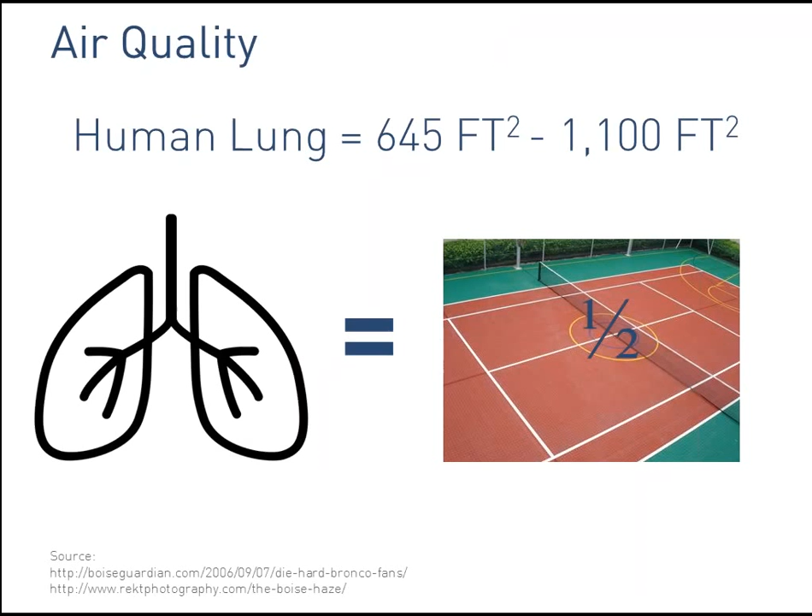Another thing to consider is the importance of air quality in a home. I think we fail to realize that our lungs have a massive amount of surface area and a huge ability to absorb pollutants in our surroundings. Our lungs have, if you spread out all the surface area, about half of a tennis court or singles player field - a lot of surface area.

And we think of the... yeah.

That's the nice thing about the heat pump versus traditional condensing units, where that heat would just build up in the laundry room, which was a nice pairing in that space potentially - not that I completely recommend that, but someone's done exactly that on a couple projects. That heat builds up normally with a condensing dryer, but with the heat pump dryer it's actually recycling a lot of heat, so it's not building up as much because as condensation occurs, it's not constantly releasing more heat - it's reusing that heat and injecting it back into the drying cycle, so it doesn't overheat the space quite as much.

That's where you definitely would want a window for your laundry room in the summertime. But when you look at the mass of the house and everything, it really can get distributed out and not cause a huge spike in the whole house. It might just be a localized spike in the laundry room.

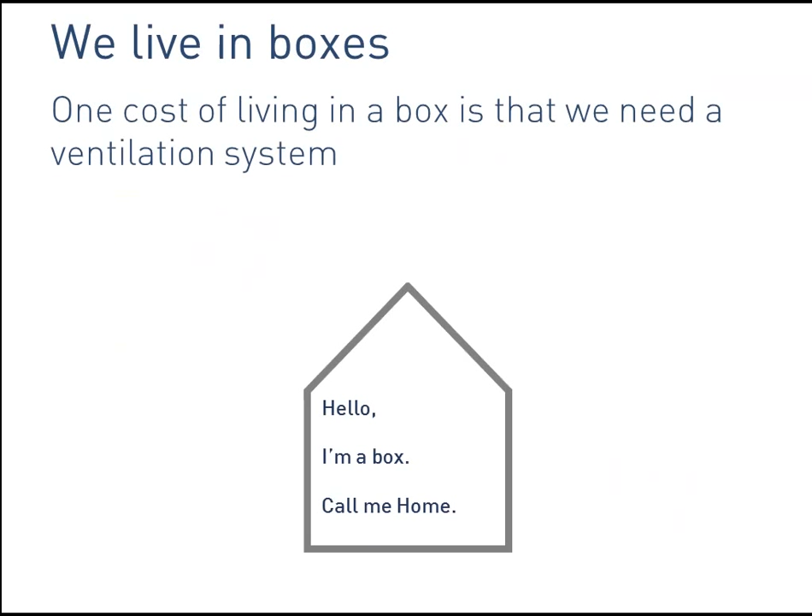I'm just going to cruise through some of this so Scott can get to his project, but just the really major importance of air quality. Basically, the moral of the story is we live in a box, and because we live in these boxes, we need a ventilation system. We can't rely on chance and poor workmanship for fresh air, which is how most buildings get their fresh air, just accidental ventilation through holes and flaws in the building.

Indoor air can actually be far more polluted than outdoor air. That's, I think, why a lot of people spend money on air freshener and things like that to try to cover the odors that are building up in their house.

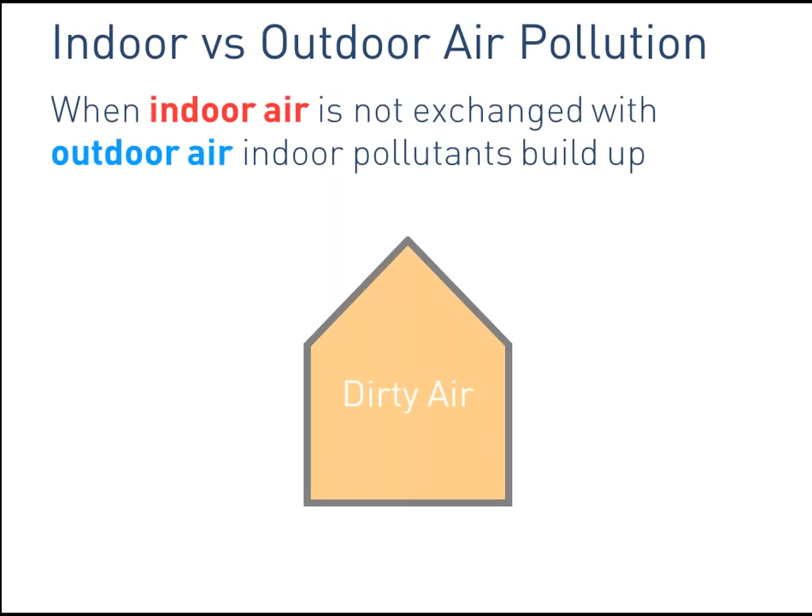I'm just going to cruise through here because I want to get to some of Scott's stuff. Essentially, we need ventilation. We want to dilute the indoor pollutants in our house with fresh air. This is just showing the unreliability of relying on natural ventilation for air, versus what our demand for ventilation actually is.

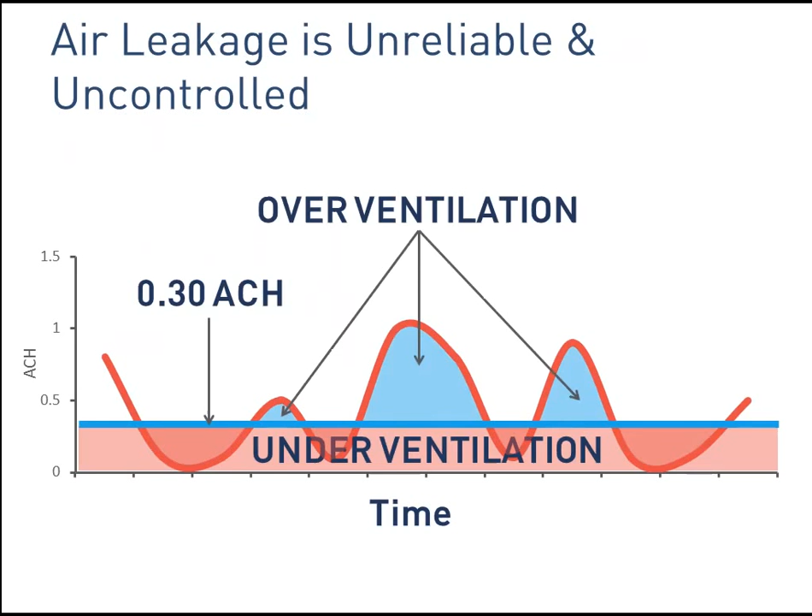Let's just skip through some of this stuff. Do you think we should just skip straight to it at this point?

Air quality is important. And in most houses, we're getting it from like our crawl spaces. And so that's totally opposite of what the passive house approach is.

Which can have radon. This was just kind of going through some of the fundamentals of the HRV. We can save it for another session. And now this should get us right to Scott.

Looks like it's going to shoot forward past your slide now.

Here we go. Now Scott's going to talk about this great project that he's working on, this passive house in Boise. Yeah, so that's the exciting thing. We're going to try to do one in Boise.

So this one is scheduled to start. We have the homeowners here. We have the chemical engineer here. And Steve, Skylar, they're all having a hand in it too.

So this is sort of a view of the entry. This project is sort of in the foothills east near Table Rock Road. And is it working? Great.

So the goals were basically to take advantage of some really nice views that they had on the lot. They wanted an energy efficient home and a connection to the exterior and kind of a contemporary aesthetic, without going too simple, or too simplistic or minimalistic.

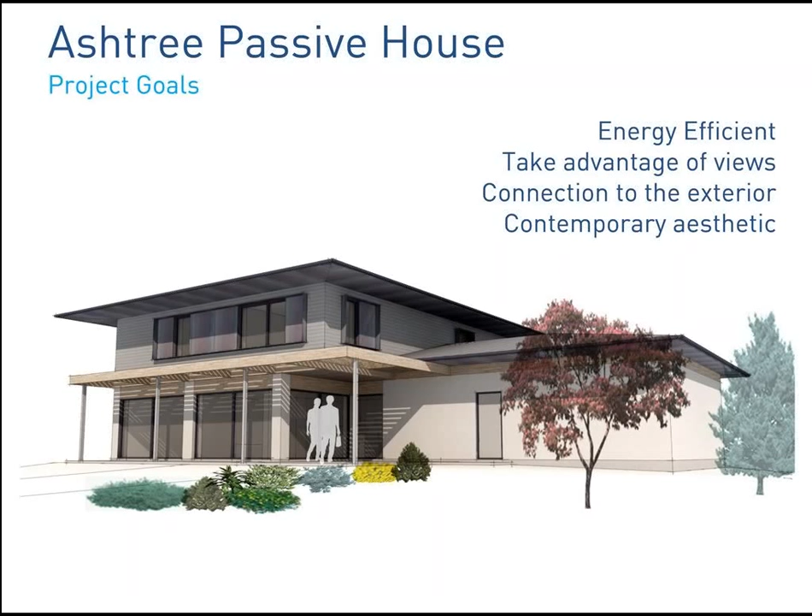There were definitely some constraints on the project. It's not an unlimited budget. There were some fairly strict neighborhood CC&Rs, and there's a wildland urban interface which really puts a lot of constraints on the materials that you can use that are fire resistant. It's a fire code.

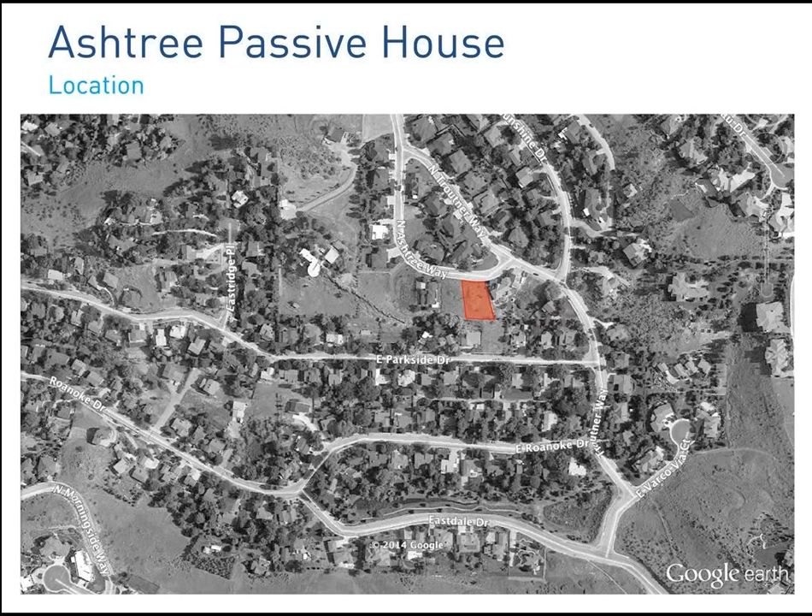So this is the lot right here. It also basically everything slopes downhill from there, so it's a nice sloped lot. The reason I put this up is just to kind of show that there's basically unobstructed solar access, which by chance is good for a passive house. It makes it that much easier to do it.

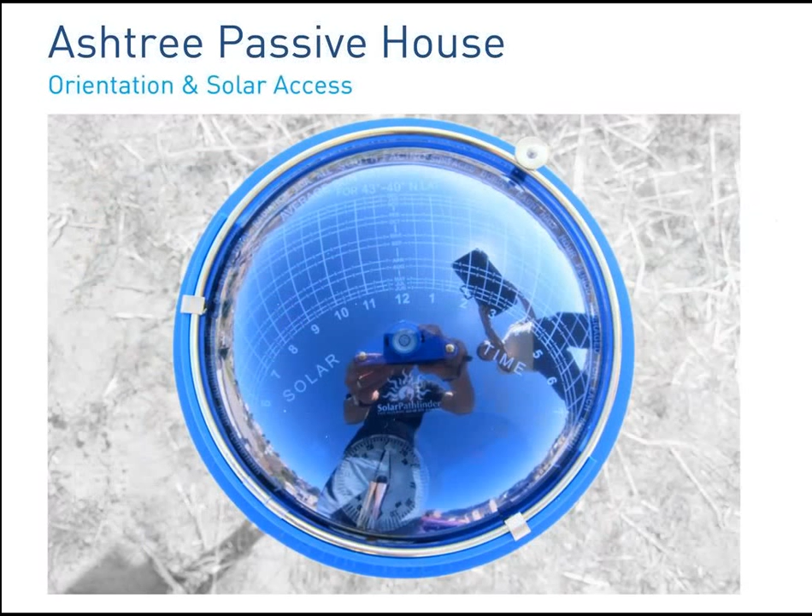This is just a quick tool that you can use to figure out how much shading there would be on that side. So this gives a reflection of basically the horizon line at that lot. So pretty good, yeah, we don't have a lot there. You could imagine if there were a treed lot or a bunch of buildings, that you'd have a lot of sun being blocked.

So the climate, just very quickly, we're in climate zone 5 in Boise, which is comparable to New York and Boston. Chicago is probably a little bit colder, but we're kind of in that middle of the country band, not anything like northern Minnesota or Jackson in that area. I just quickly wanted to point out the heating degree days is sort of a measure of how cold it is, how much time your house needs to be heated. In Boise, we're similar to Boston, less than Minneapolis.

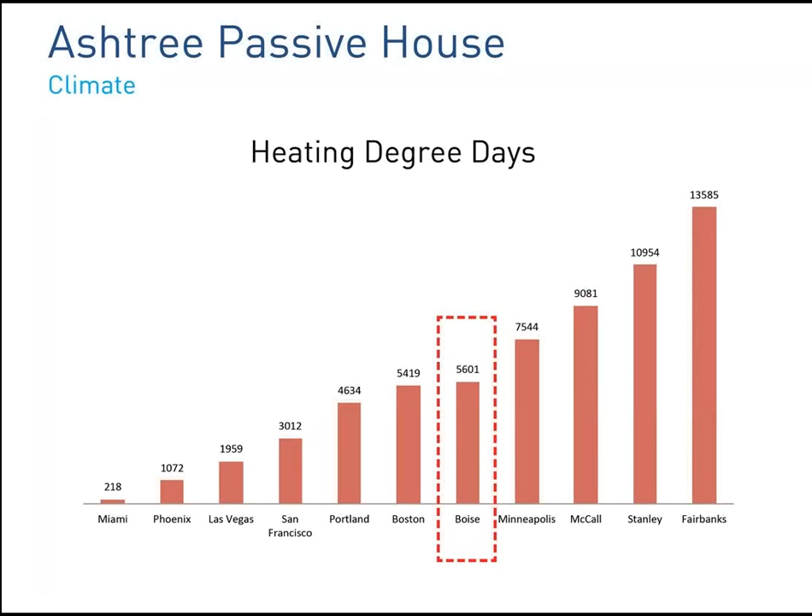I put McCall and Stanley because they're places in Idaho that are cold. Stanley has a lot, not as much as Fairbanks, but still it's a cold place. Look here at Miami, they've got nothing. On the opposite side, the cooling degree days, we're actually not as much as places like Phoenix and Las Vegas, but if you compare it to McCall, it's 3 times as much here in Boise. So heating and cooling is an issue in Boise that we need to take into consideration.

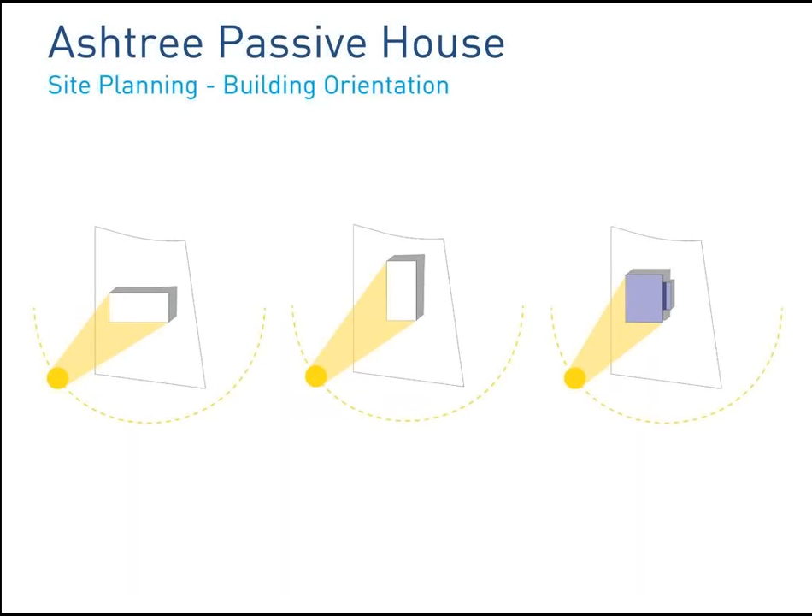So we ended up with something maybe that's not perfectly optimal, but just the way the constraints were on the site, it's generally a cube. This is our site plan with access from the street. There's a garage on one side, and this is the footprint of the house.

We can go through this quickly, but I just wanted to point out that the surface area to volume ratio is an important consideration when implementing a passive house design, a passive house standard. If you have a big cube like this, you have a lot more interior volume compared to the amount of surface area, so you have a lot of heat but not as much comparable space for it to transmit through. Same thing here—a single-story house is not as optimal as, say, a two-story house, and even if you go up to three stories, it actually gets not quite as optimal.

This form factor basically shows that you can have the same size house as far as the footprint and square footage, but if you arrange it in a way like this U shape, you have a lot more surface area where you can lose heat. Notice all these have the same floor area, every single layout.

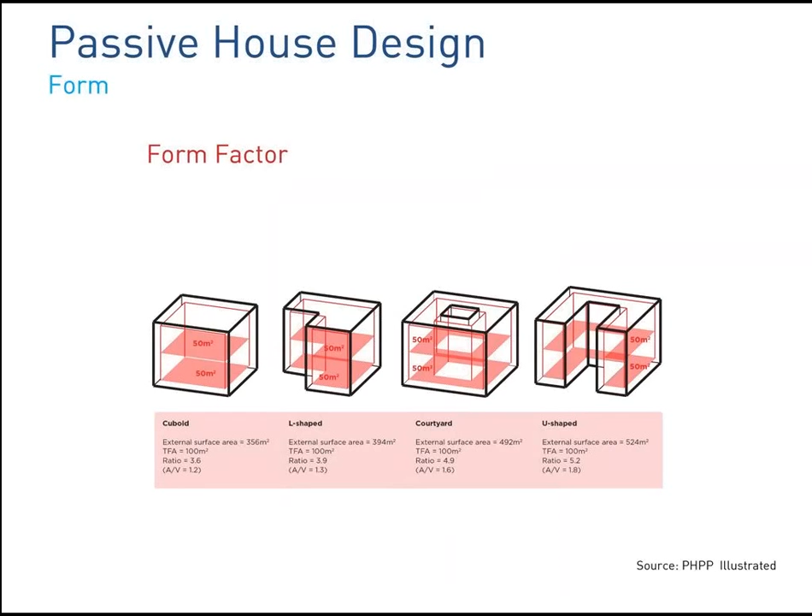This happens to be the volume, essentially our thermal envelope of the project, and this ratio is at 0.93. I did it in metric to compare it to these graphs. We ended up with 0.11 for the middle, and 1.1 and 0.46, so we're somewhere in between these two. I just wanted to point out it's not a perfect box—you don't have to have a perfect box, but it does help to not have a very complicated form.

This is sort of an extreme example, but you can imagine the amount of surfaces you could lose heat from on a design like this. It's possible to do it, but you have to consider how difficult it would be to detail that correctly.

So this is the issue: you have all these materials and components that go into a house, and how can you get all that stuff to come together to meet this 4.75 kilo-BTUs per square foot per year? We want to meet those energy goals, make sure it's comfortable, have good air quality, and make sure it's durable so it's going to last a long time.

It takes a lot of general architectural design—that's part of it—but one tool that really makes it possible is these energy balance tools. The Passive House Planning Package is the original software that the Passive House Institute in Germany developed, and that's what we're using on this project for now. There's another alternative called WUFI Passive, which basically does the same thing and has some other advantages. This is the tool that lets you optimize all those different parts.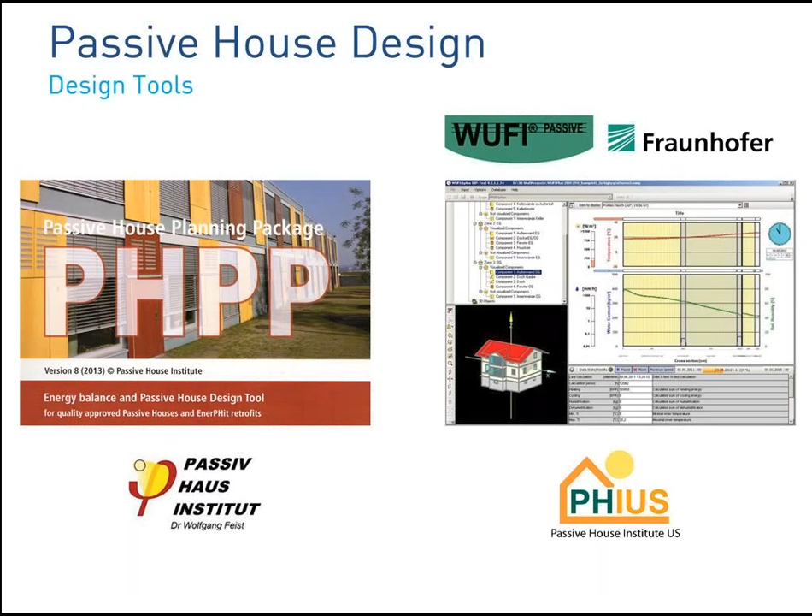These were really developed for low energy buildings. Unlike a lot of the energy modeling tools out there, things like ResCheck, which are more of a compliance tool you'd use to be sure you're in compliance with something, these tools are really geared to optimizing low energy buildings and balancing things like solar gain, insulation, air tightness, high performance ventilation, and mechanical systems.

The Germans developed this in an Excel format, I think, because it's easy to see what's going on. You can put in an input and see what happens - oh, it changes it by this much. I change these windows, it does this. It's really easy to see. It's not easy to do it, but it's easy to see what's happening.

They've done a lot of dynamic simulations that they've normalized, and checked it against monitored data. So what their tool is doing is not perfect - you may be able to do a better dynamic simulation with different software, but it's the best way to do it.

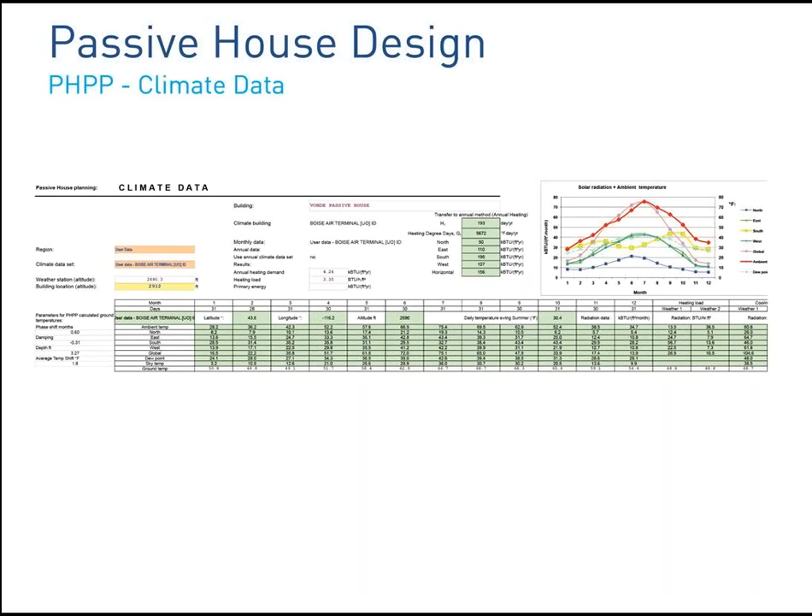You can even do exterior shades and interior shades, and you can kind of see what impact those make in terms of overheating. And it will calculate your internal heat gains, and it will also help you determine what level of energy efficiency you need for your appliances.

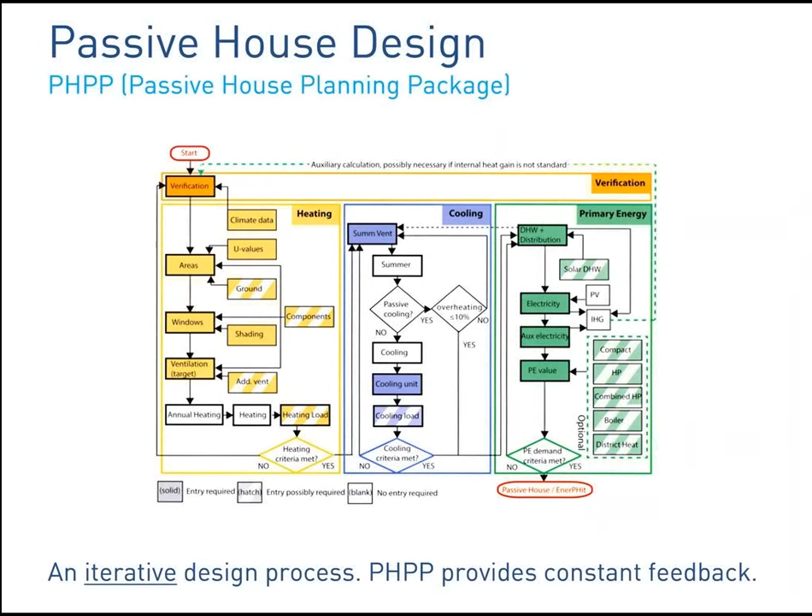So this is just to show you the graphic of the process to fill out this spreadsheet. It gets a little complicated, but it's really just these first yellow ones that are most important, just to see how you're doing. If you're going, that's the heating side.

You had mentioned earlier that the windows were European sourced. Are there a lot of the other components that have to be sourced from Europe, or are there supply chains here in the valley?

So the question is about whether the components you need, specifically the windows, all need to come from Europe or can be sourced locally. I think the two biggest things that end up being best to get from Europe right now are the ERV, the energy recovery ventilator, and the windows.

Those are the energy recovery ventilators. There's a couple different ones I typically use on projects, and one of them has a warehouse in Denver, and then a warehouse in Olympia and also on the East Coast, so they're really readily available. It's basically like a European product, but it's on the market here.

It's no problem. And then there's really only one true passive house level European window. There's a handful in the United States, but one in Vancouver, BC that I'm using on a project in McCall right now, and those are passive house level windows coming in from Vancouver.

But the lineals that they use to make the frame come over in a container from Germany, and then they're fabricated in Vancouver.

But there's a few windows in Canada that can be used on a passive house. In McCall's climate that would be really challenging, but you might be able to get away with some of the Canadian windows, like Cascadias or Loewens or something like that, on a project in Boise.

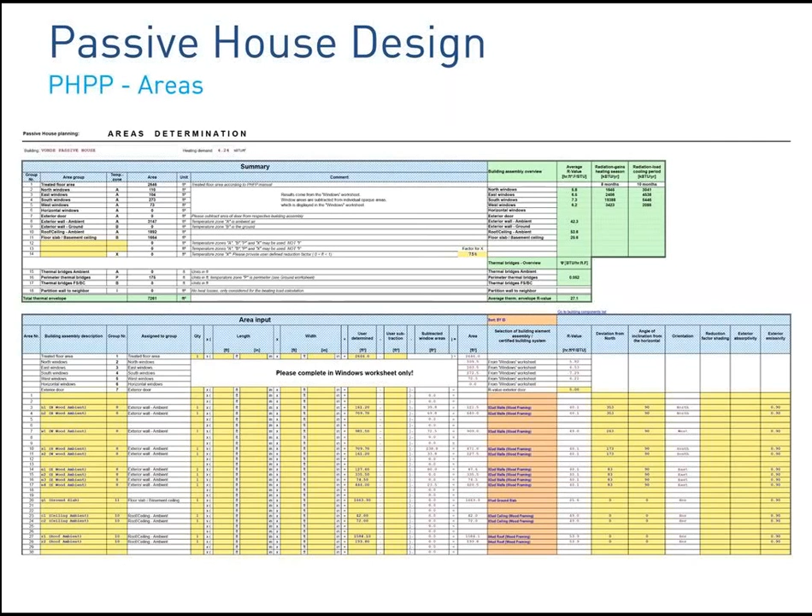So this is a page where you put in all the areas of the envelope, so all the wall areas, the roof, the slab, so all those pieces of the house that can lose heat through. This is a calculation of the area of the house, sort of the floor area, and that's an important number, the reference number for that 4.24 figure.

All of the areas, this is a way that I do it with a little 3D model, and I can just click on the surface and get the area. I label all these things, and it's easy to do. You can change it, but you take the west wall, it's this big, and then you go back and put it into that big sheet. So it's sort of an old method. There's newer software that makes this a little easier, and another way to get this into the spreadsheet quicker, but it's really not that many things once you get started.

And then you have the Windows page. So you count all your windows and label them all, input their sizes, and then input where they are into each envelope piece. So I've got west wall, I've got these windows, you can see my groupings here, north, east, west. You put in all the information about where they are, their sizes, and it's very detailed in the way that you can show how that window actually fits into the assembly.

And in the passive house model, there are a lot of variables that you can look at. How good is my installation value? Did I over-insulate the frame, which is something that doesn't exist in the U.S., but actually put insulation over the frame. So the level of detail that you can put with the windows is impressive.

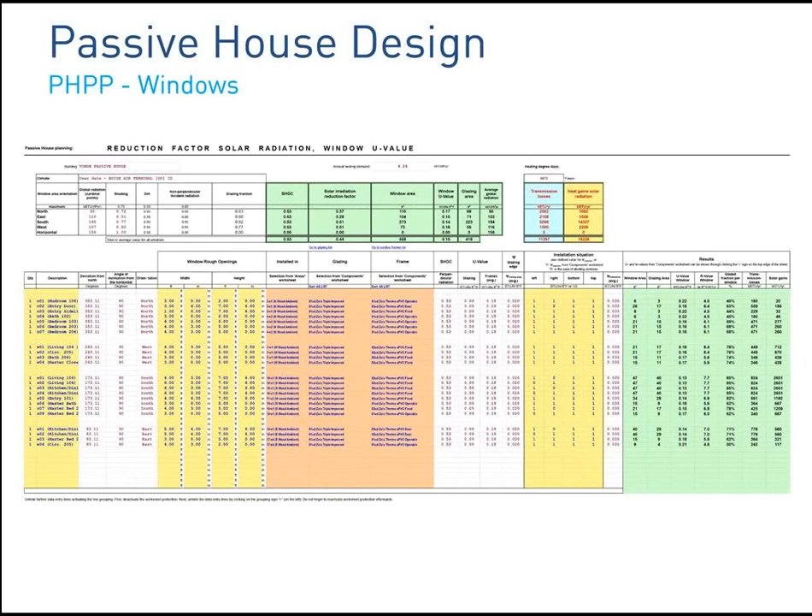So shading, same thing, this basically goes through each individual case. Is there an overhang? Do we have blinds? Is there a tree blocking it? Is there a railing or something like that? So you can put in all those conditions.

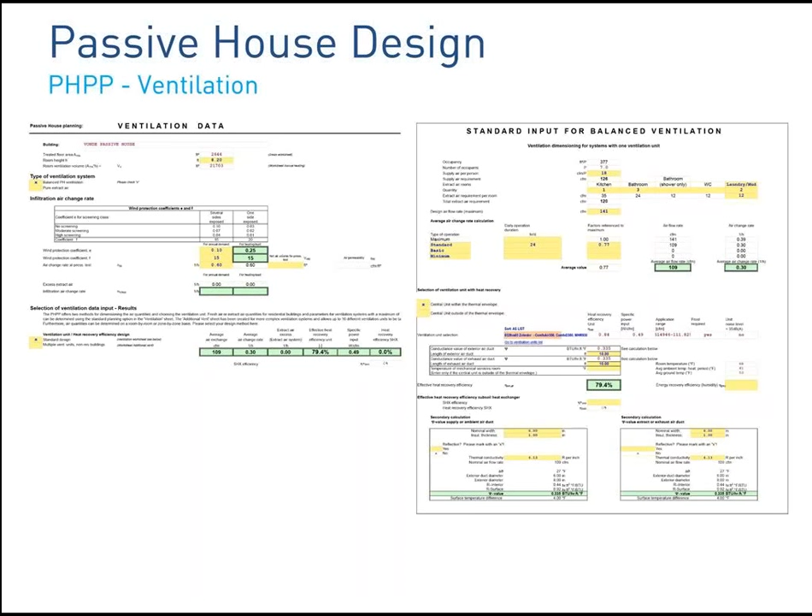Ventilation, this is just a way to help determine the amount of airflow that you need in the house, and it depends on your air tightness, which plays into this. You put in the efficiency of your heat recovery or energy recovery ventilator, and this is a big impact on the energy. I always see this, you can change the length of pipe from the unit to the outside, like insulating it with 1 inch of something, and it makes a huge difference. So it's to that level of detail, how are you insulating your ducts from your unit to the outside air.

What is your active heating system in this project? For this project, we're going to use the ductless heat pump, so the mini splits.

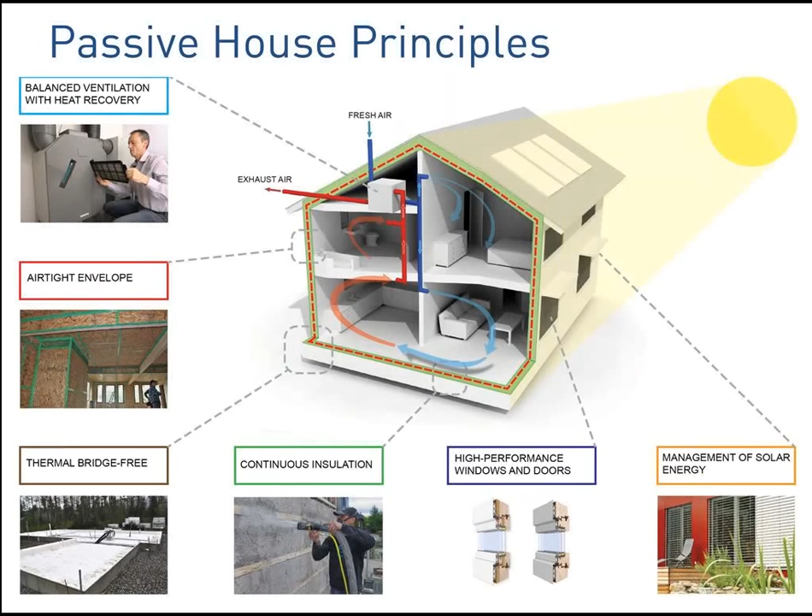Just to reiterate those points: continuous insulation, airtight, thermal bridge-free ventilation, and the windows. I wanted to refresh really quick and then go through what we're going to do to meet those points. So the continuous insulation, this is a wall section, kind of our basic wall section. We're going to do a slab on grade, just a thickened slab with foam continually around the concrete.

We'll do a traditional 2x6 wall that's going to be built with cellulose. And on the outside of that, there'll be a joist, a TJI, or one that we'll make on site, basically an 8 or 9 inch joist, or a sort of a... you can describe it.

Sometimes you call them a Z joist. It's basically an I joist that you site fabricate with a strip of plywood and then 2x2s, and you tack it all together, and it creates like a Larson truss on the outside of the house that just supports the insulation and the cladding system, and then you have a rain screen system after that.

I'm not sure everyone's familiar with the whole thermal bridging concept. So you can explain how that 2x6 doesn't make it to the outside of the building.

I wish I had a plan view of this wall, but basically you can imagine the studs are lined up vertically, and we're going to attach those TJIs right to the studs. So it will actually connect, there will be a thermal bridge that comes all the way through that wall. But we're just going to take that into consideration, it's calculated for, and it's also wood and not steel.

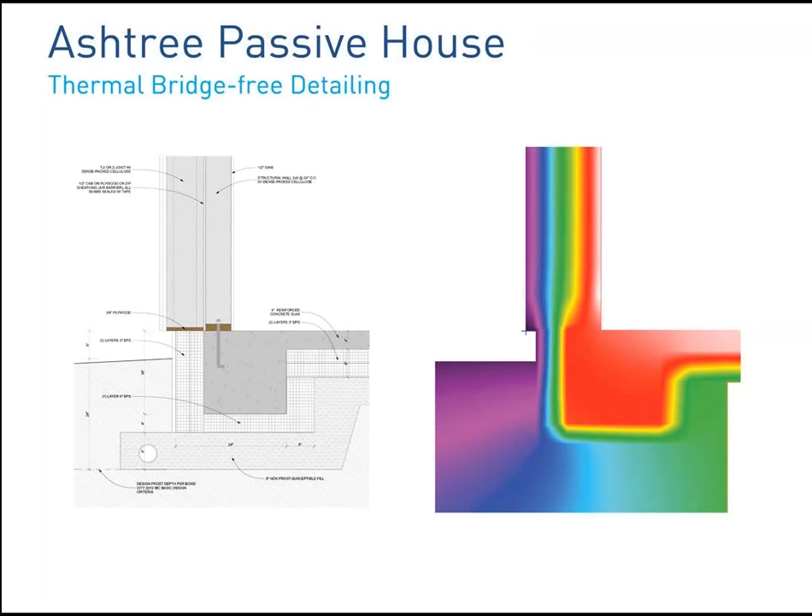So the next principle is air tightness. A lot of planning goes into these passive houses. I think the air sealing is one of the biggest issues you have to face—how am I going to design this wall so we can actually get it airtight in the field?

This project is just going to use the structural sheathing—we may use normal OSB, or like Goldie used, the zip sheathing. So what you have to put on anyway for your structural sheathing, we'll use that as the air barrier, and we'll tape that or use a fluid applied sealant one way or the other. That continues all the way around. I can show you here—the important thing is that air barrier is continuous. So how it meets underneath the slab, we'll have a vapor barrier under the slab, and that has to be connected to the OSB, so it makes a complete enclosure.

If you go back one slide, with the structural wall cavity now, your plumbers and electricians can run through this cavity. You can pierce all the holes you want through your gypsum and drywall, and you still have this uninterrupted air barrier protected in the middle of the wall. Structural engineers should really like this too, because your structural wall and sheathing stays warm and dry, isn't exposed to the elements—it's going to be a much more durable wall.

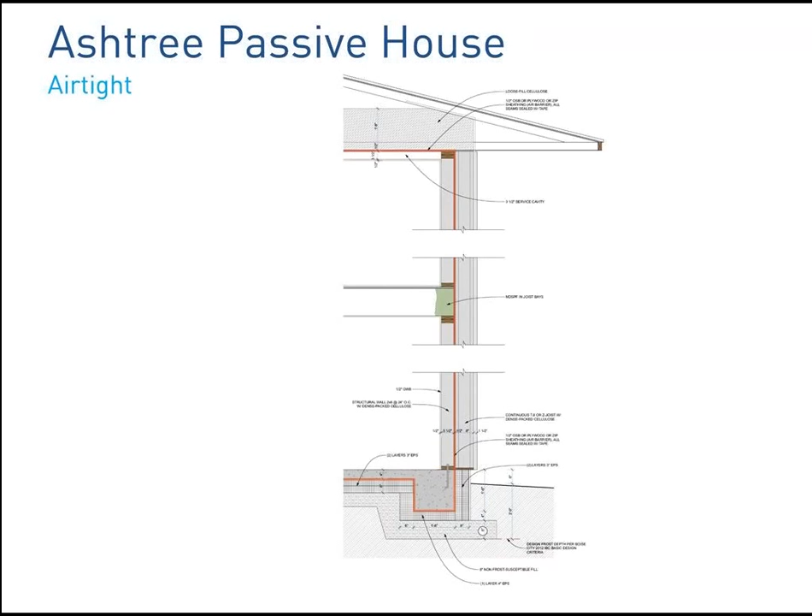The windows, we touched on those. We're going to most likely use a UPVC window from Europe - it's sort of the most cost-effective option that you can get from Europe. So unfortunately, no nice wood European windows.

Who's actually going to build this house? Because you're talking about an extremely high performance home, and somebody who's going to need to have a lot of experience to make this actually happen.

Yeah, we're assembling a team as we speak - we're going to build it. Steve and I are the general contractors, and so we'll be putting together the team. So you guys build it yourself? Some of it, yeah. What I think will happen is that, as I said, the framing - we want that to be something any framer can frame this house.

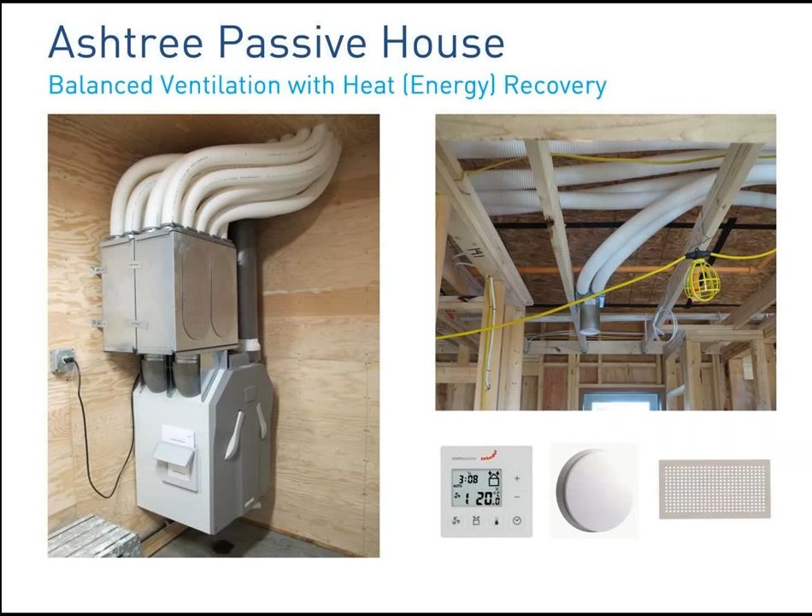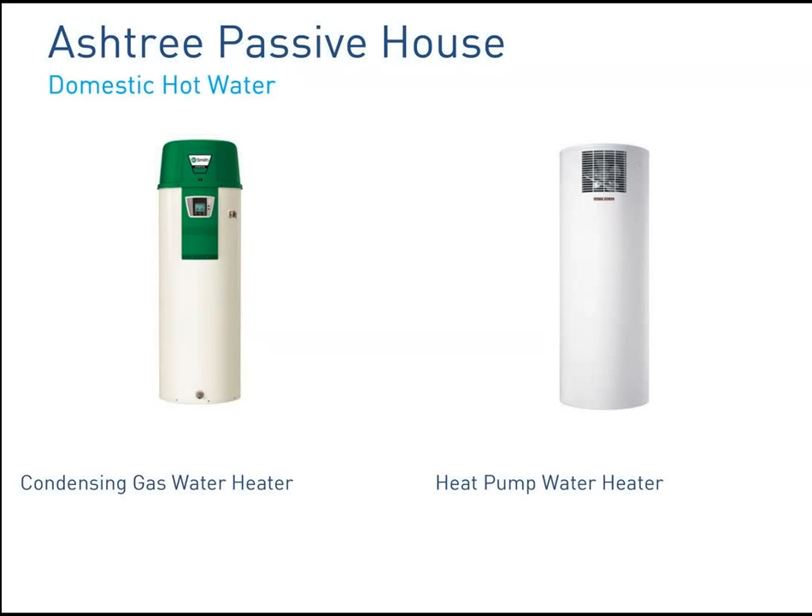The reason I asked is because I know commercial is a good way to go. It would be great for commercial applications. Any other last questions? Thank you, everyone, for your attention.